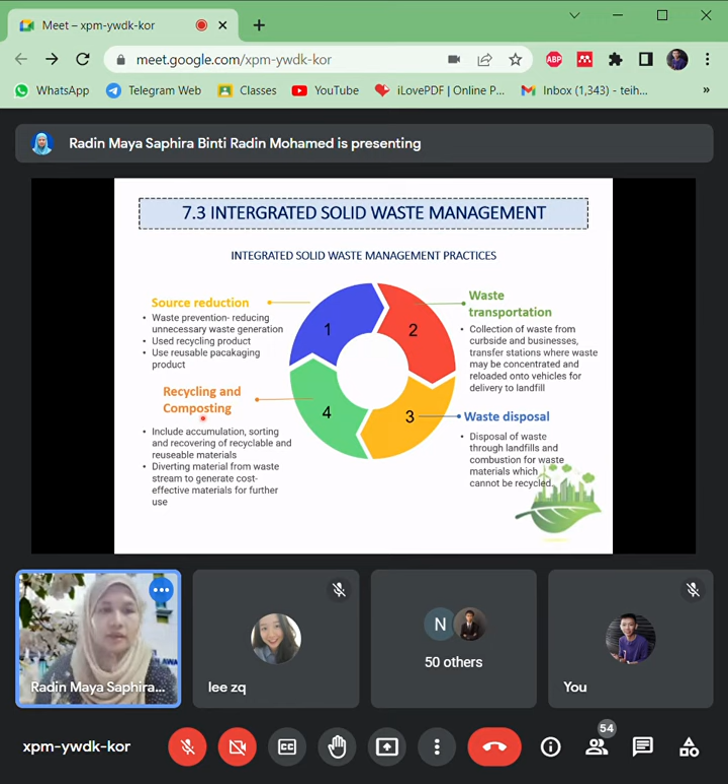Okay, and then this is at landfill. I will explain about what is the mechanism of landfill management. And then as we know, we need to always do this as a habit and culture, always recycle and do the composting from our waste. This is basically the landfill, the design itself is like this.

Tak ada network eh? Dengar tak suara saya? Network pun macam tak berapa bagus. Saya dah tekan. Dengar suara? Tapi yang ni tak okay. Kalau saya terkeluar, just in case, let me know ya. Sebab ni doktor, on off, kejap ada kejap tak ada.

Okay, so this is basically the sanitary landfill. Sanitary means they provide all of this facility with a treatment system. Treatment system here means leachate. What is leachate? Anyone who wants to answer about what does it mean by leachate? Ada siapa tahu?

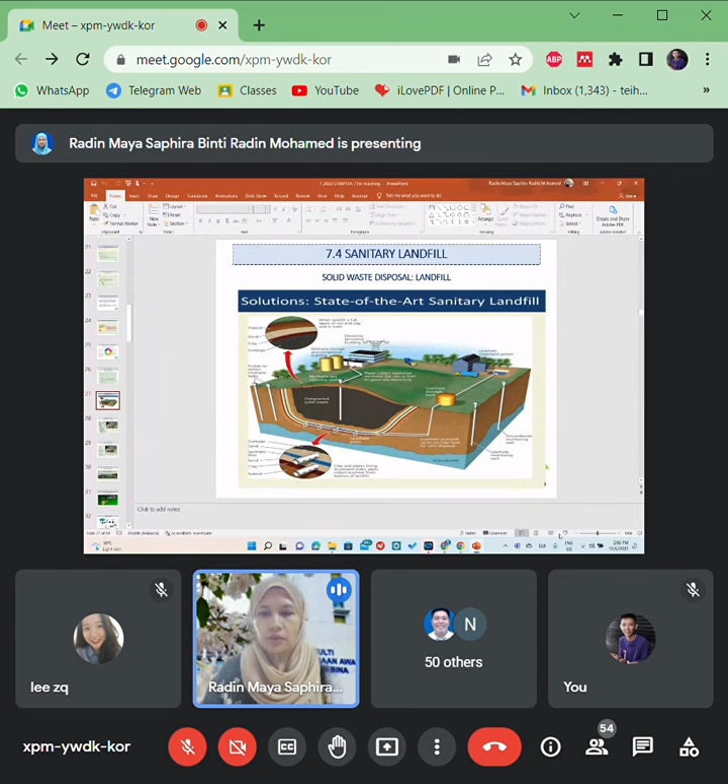That's correct. Basically, it is the liquid that comes from the waste, daripada sampah tu air larut resap. So this is a very dangerous liquid or solution because it carries all the hazardous waste. And this leachate, if we didn't treat it very well, it can go into the water bodies and disturb our water supply quality. So this is our main concern, leachate.

Leachate must be treated under a treatment system using secondary biological treatment, similar to what you learned in wastewater. The concept is the same - we have aeration, then we do the treatment using biological treatment. After that, we pump it out into a storage tank, and it goes into this piping line to reach the water bodies.

We discharge into the river. So basically this is the state of the art of the sanitary landfill. Sanitary landfill means they must provide the sanitary treatment process - treatment for leachate, and then they have piping to collect the methane gas. Sometimes the methane gas can also be captured for electricity.

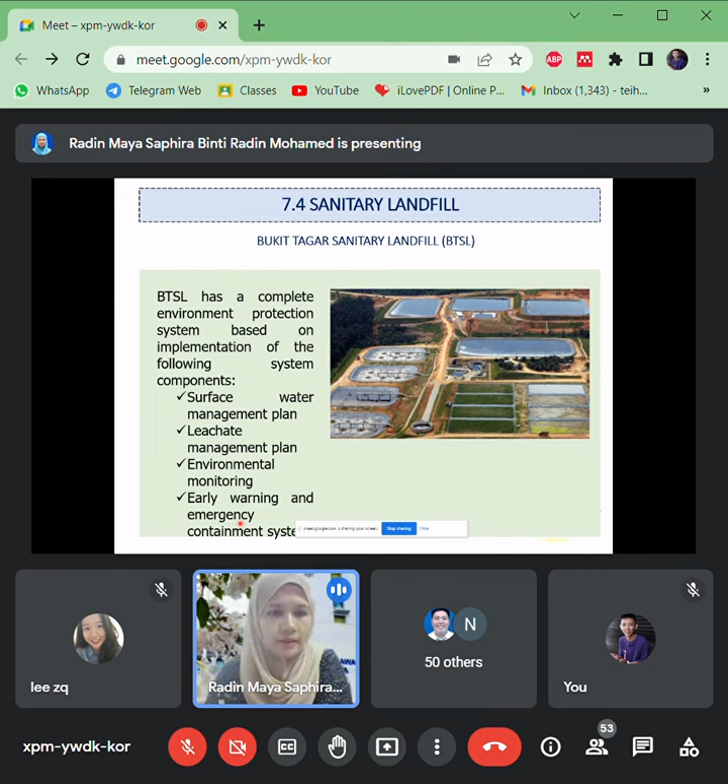This is an example of the Bukit Tagar sanitary landfill. We call it a third-generation sanitary landfill because it contains a surface water management plan, leachate management plan, and they also have monitoring for the environment, plus early warning and emergency containment systems, which is very good.

In Bukit Tagar they also have a renewable energy center which captures the methane gas for electricity.

If you have an opportunity to go on a site visit, or in future have the opportunity to work with this type of renewable center, that would be good. Examples from the landfill show we can get resource recovery.

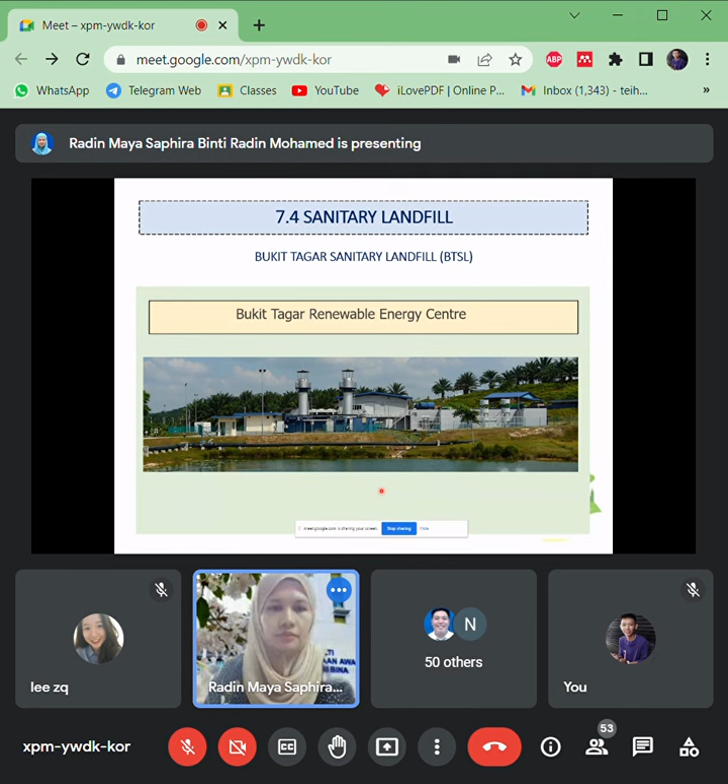Where is Bukit Tagar? Does anyone know? Bukit Tagar, I forgot. Does anyone know? In Selangor. Where in Selangor? Just Selangor. Okay, in Selangor - it must be generated from the waste generated from... it's really called Bukit Tagar, from the urban area, KL Selangor.

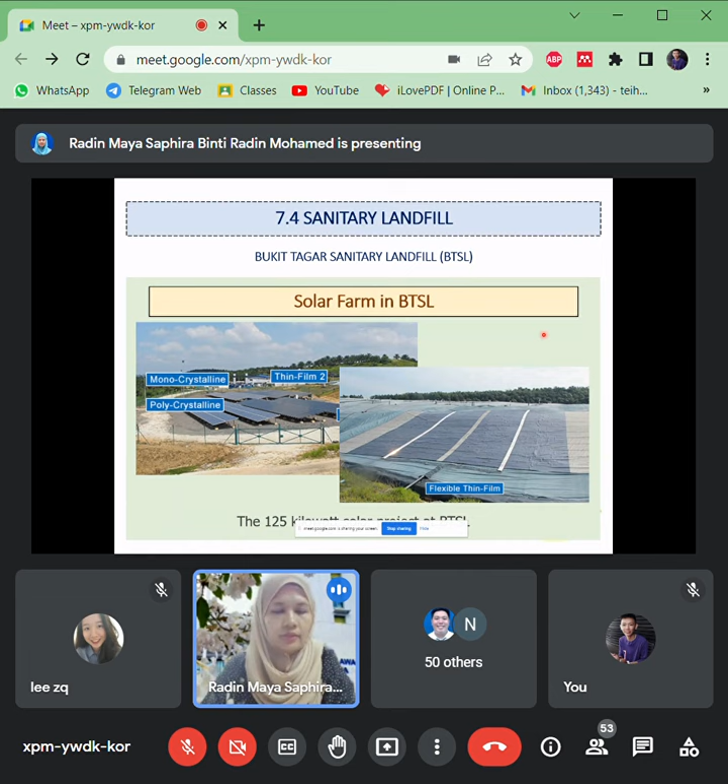Also in Bukit Tagar, they have this solar project to generate electricity, and that is the sanitary type. Sanitary means they provide all this treatment system for gas and especially for leachate, the liquid coming out from the waste.

But we also have another type which is non-sanitary, only a dump site. This is of very much concern for the environment because they don't provide any treatment for leachate and also don't capture the gas. So this type of landfill is very dangerous.

This is the landfilling method for depositing solid waste using trucks. Every day they must cover the material up to 20 to 30 centimeters, according to solid waste management. In Batu Pahat we have waste sorting.

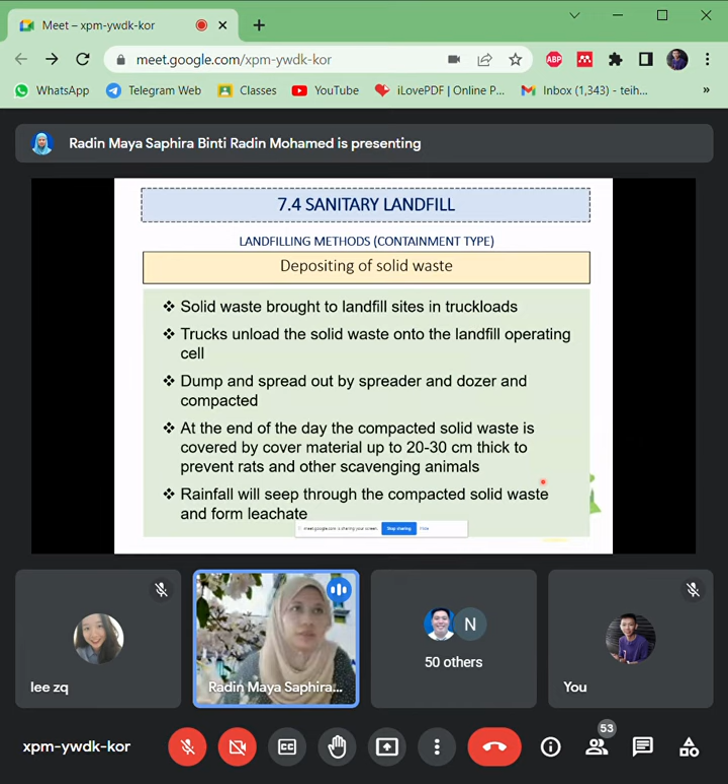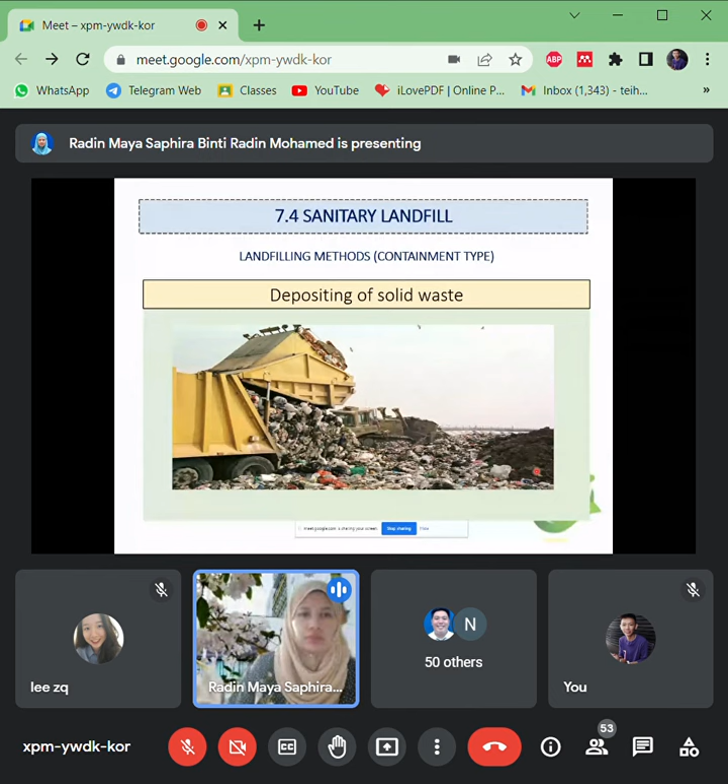Every truck must pay the contractor that manages the landfill. I don't remember how much, but they have to pay according to the load. This is how they deposit the solid waste, and this is a photo of how they spread the waste, do the compacting, and also the covering.

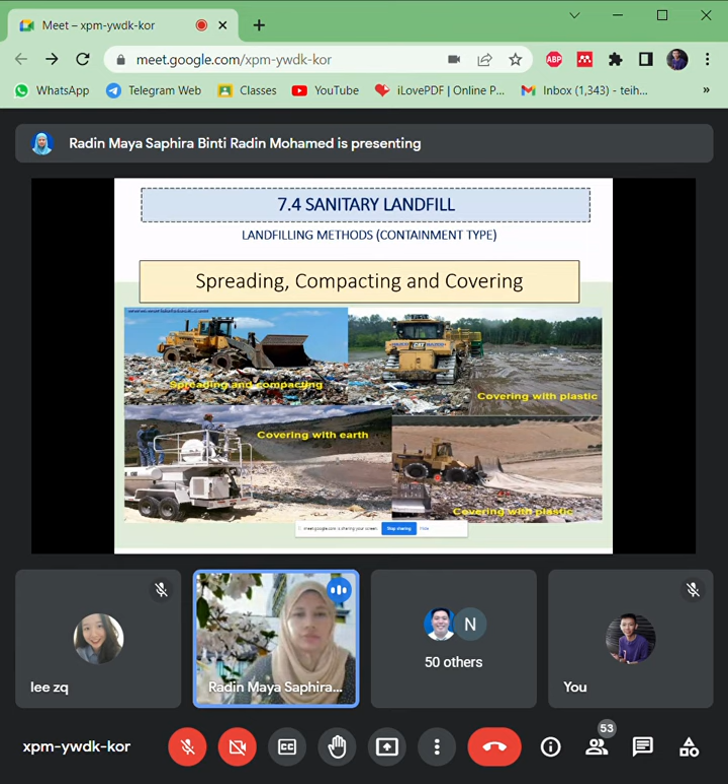After a certain layer, they must do the covering. This is how they do excavation trenches in order for the waste to be deposited in a certain area. So we can have the excavated trench or cell method, the area method, and also build like a canyon or depression method.

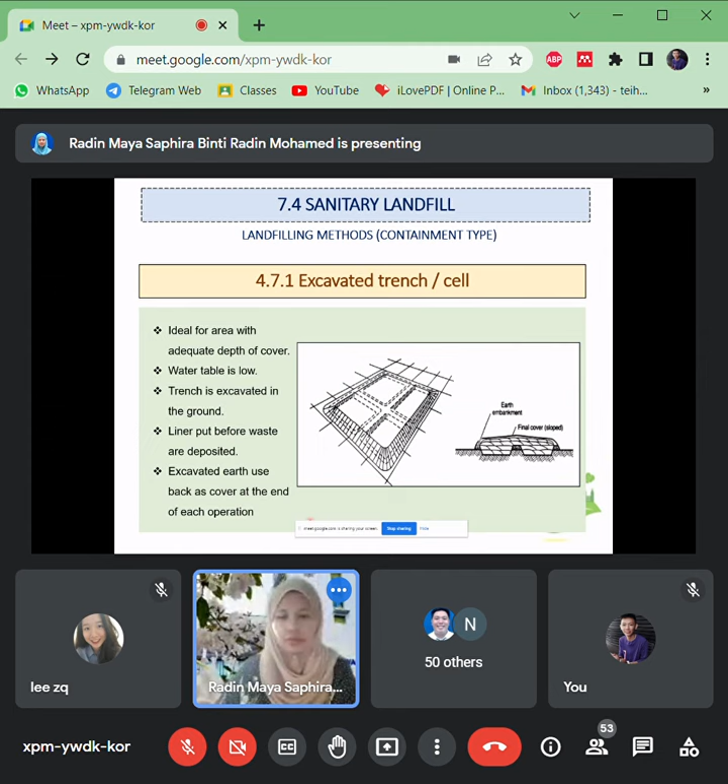This is how we can provide the cell, like a container for the waste to be deposited, and this is the excavated trench. For the daily cover, we must compact it like this. And this is the area method.

And then there are certain considerations that need to be considered. For example, terrain not suitable for excavation. Terrain ni dia macam levelnya. High groundwater level not suitable for this area method. Okay, and so on. This is the area method.

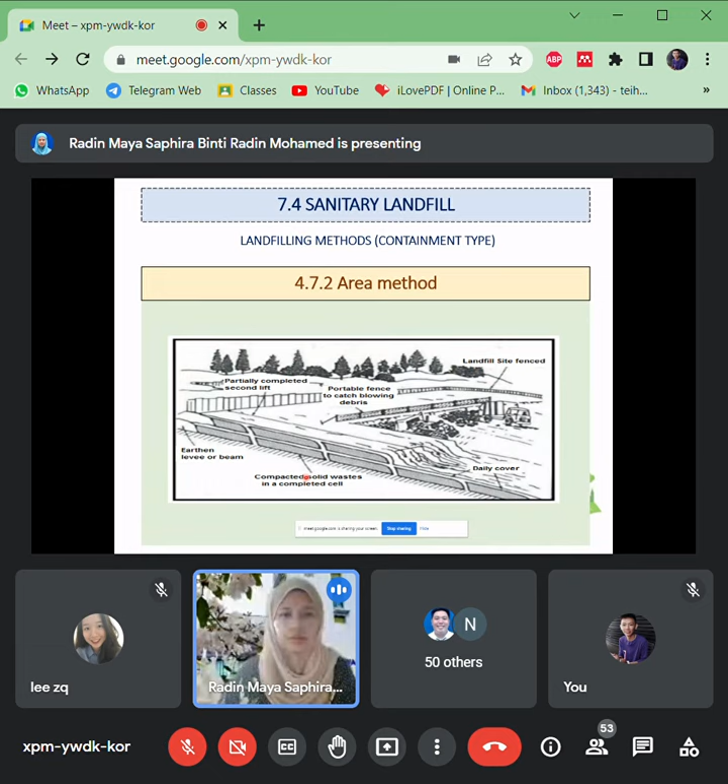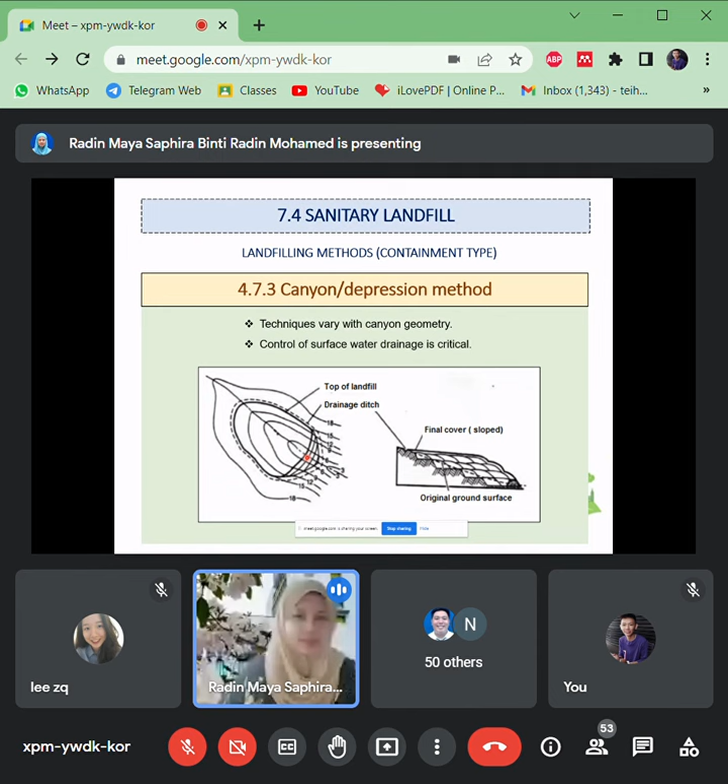So it's like having the side fencing like this. So this is the daily cover macam daripada bawah. So the safety also needs to be considered. For canyon, it's like we put it in hills like this, something like that. It's like this, layer by layer. This is the canyon type landfill.

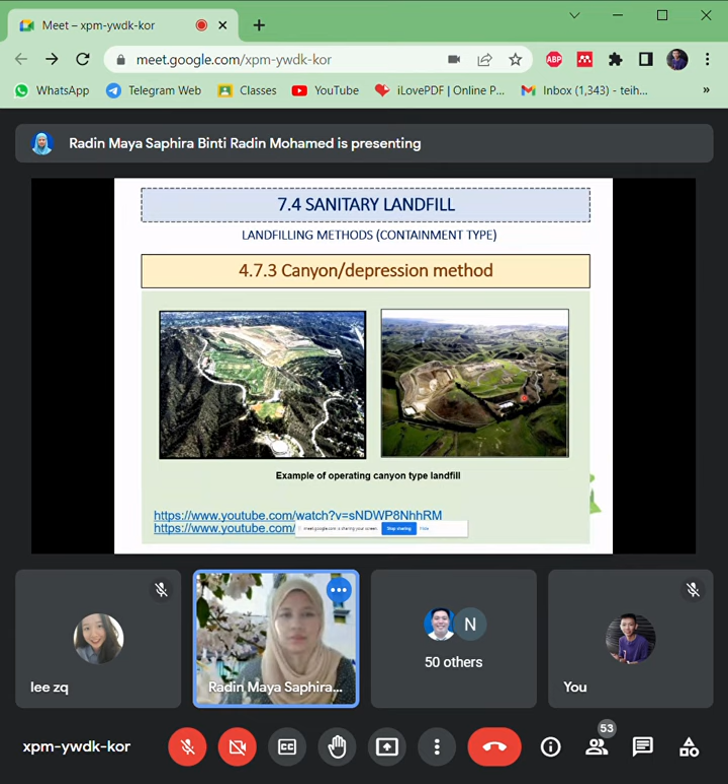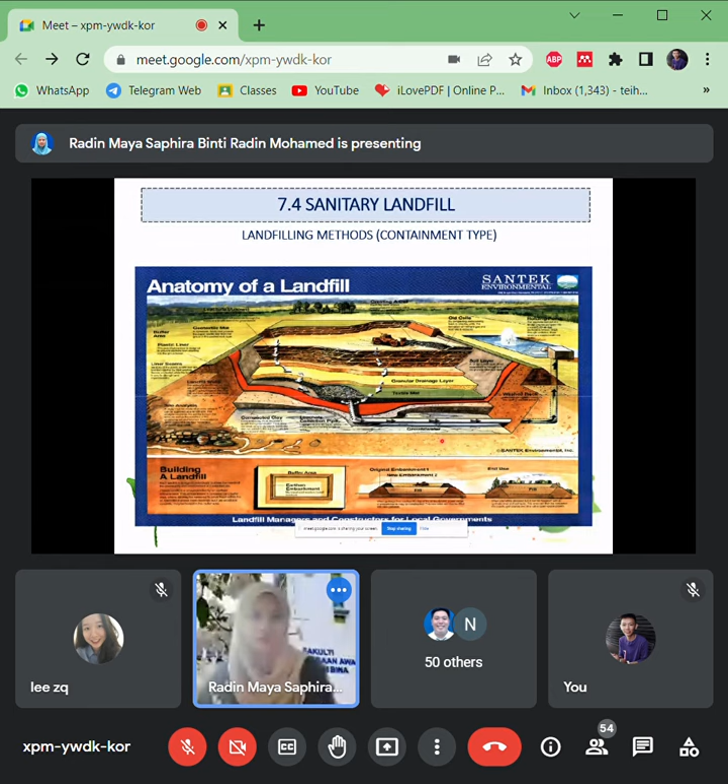The considerations are like this: landfilling methods, and then the landfill gas that is emitted, because it's very dangerous. It contains lots of methane gas. And then the cover layer must have these materials: geocomposite drainage layer, HDPE geomembrane liner, and compacted clay. This is to avoid the leachate directly infiltrating into our groundwater and also the water supply.

And we must also have the leachate collection pipe to the wastewater treatment plant. The leachate will be transferred to the treatment system for treatment. The treatment system must have aeration and also biological microbes to degrade the organic matter. So in Malaysia, we have certain classifications and standards that we need to follow before discharge into the water body. The landfill operator must adhere to all of these requirements by the Department of Environment.

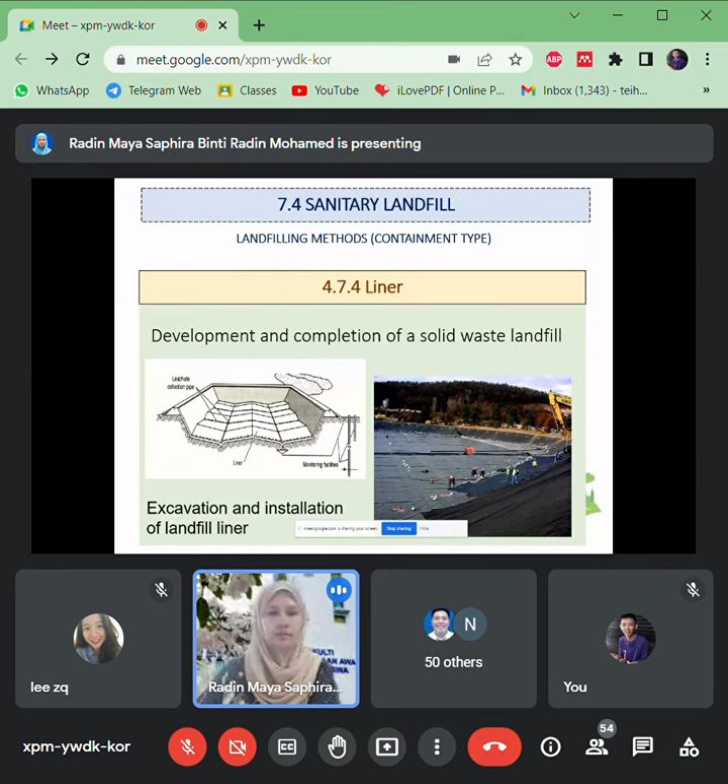Okay, this is the liner. During landfill development, we must install the landfill liner first. The landfill liner must have the geomembrane for the hydraulic barrier, geosynthetic clay liner, compacted clay, and also geotextile for cushioning and filtration. It looks like this during excavation and installation of the liner. It's like a baseline ataupun cover, especially for the landfill leachate, the liquid from the solid waste, from all of the domestic waste.

Okay, are there any questions so far about the landfill?

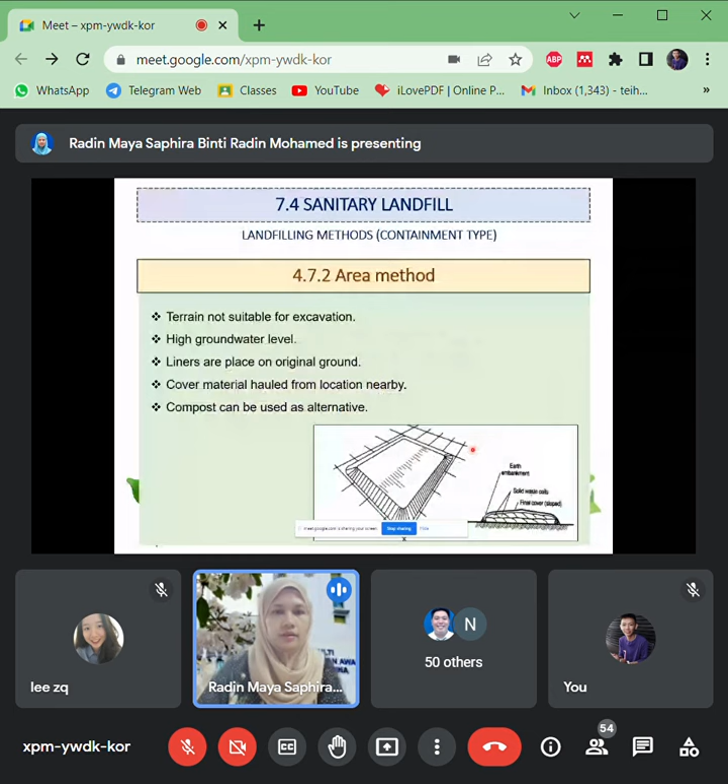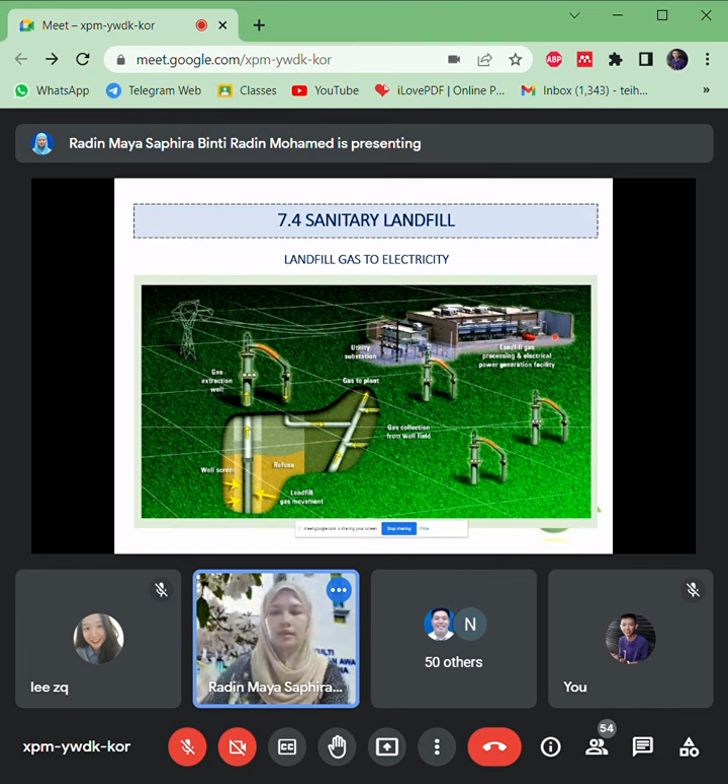Let me repeat. The most important thing in the sanitary landfill is the landfill leachate treatment system, itu kena ada, and also the gas extraction well. Gas is very important. Either you release it or the landfill has the facility to convert it into electricity like this, or renewable energy like this lah. Piping for the methane gas and so on is very important, and also the leachate.

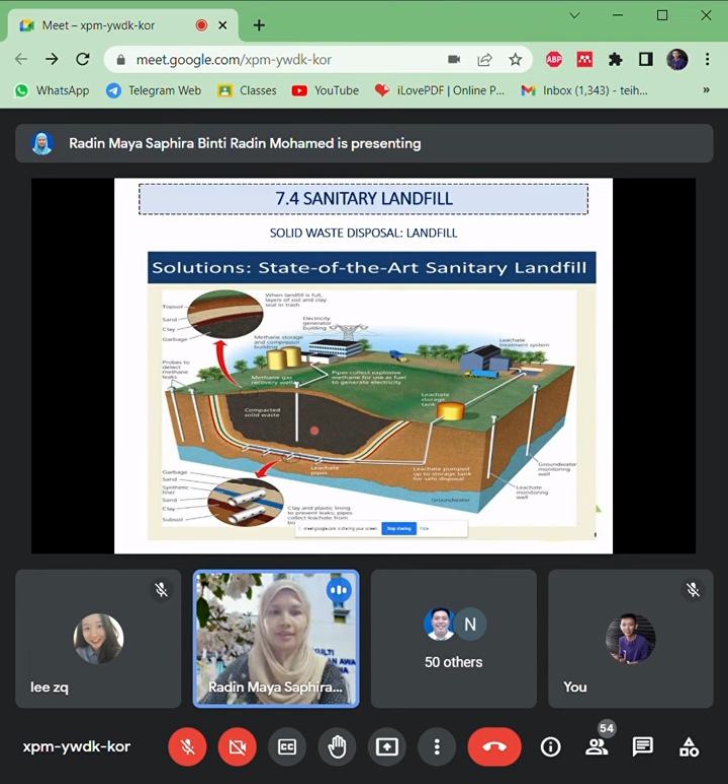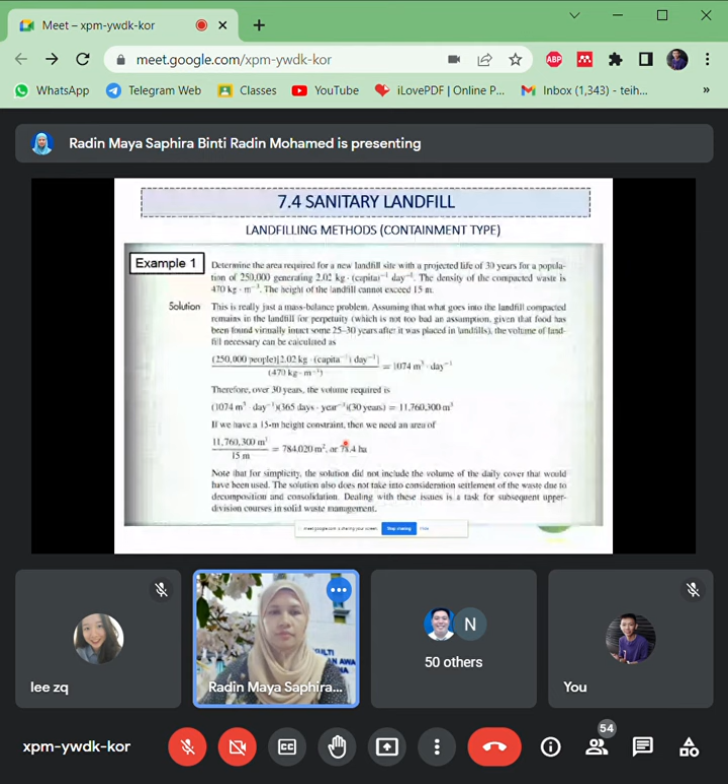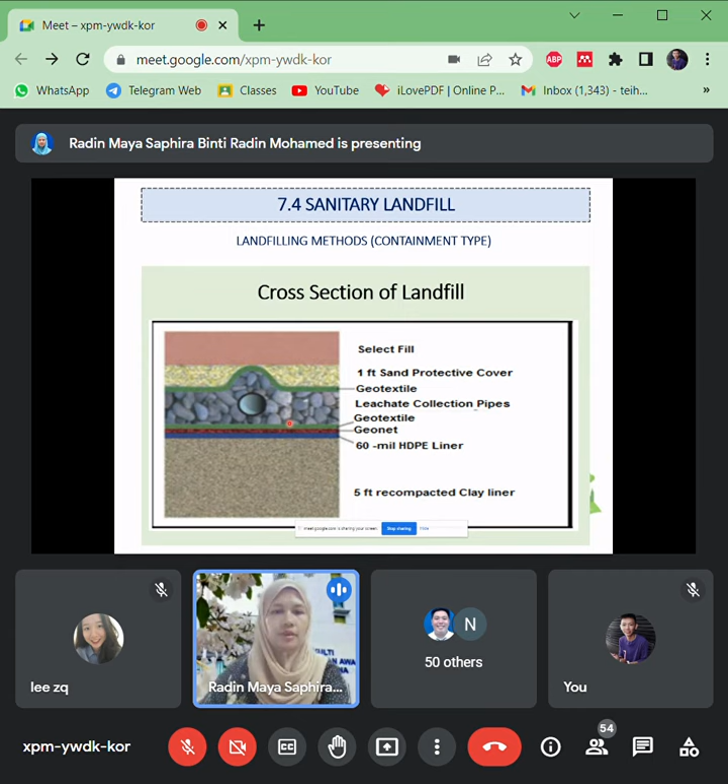So in order to prevent leachate pollution or leakage, we must provide this liner during the design. This is the cross-section of the leachate drainage layer. We must provide the geotextile and leachate collection pipes. This is the leachate collection pipe, and then we must have the geotextile, geonet, and also HDPE liner. So this is the standard for landfill development.

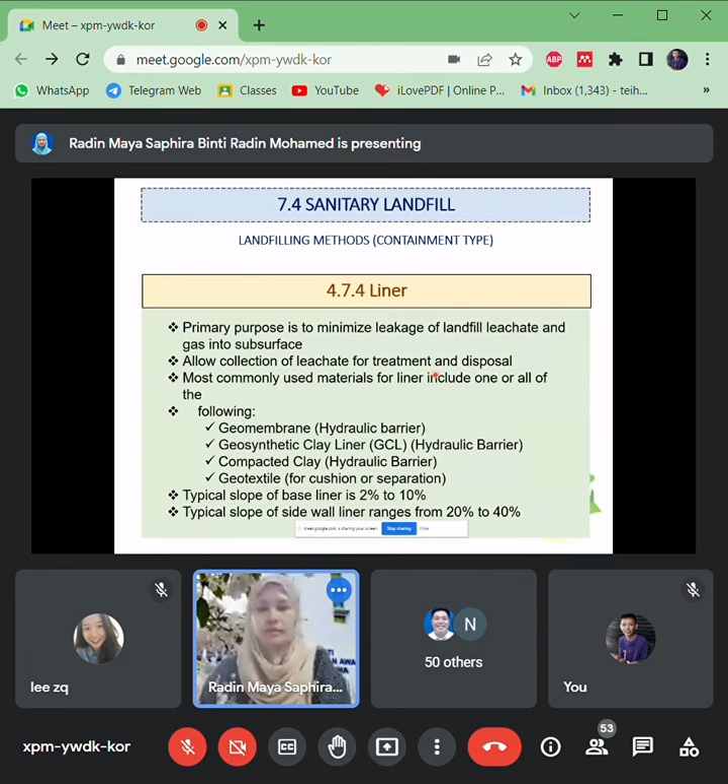Okay, then next is about the leachate, the major concern for the landfill. The success of a landfill depends on how they manage their landfill leachate. This is very highly contaminated because it comes from the solid waste that is dumped into the landfill. So we must draw it up by using a pumping system inside the landfill, to be treated. It must be treated first.

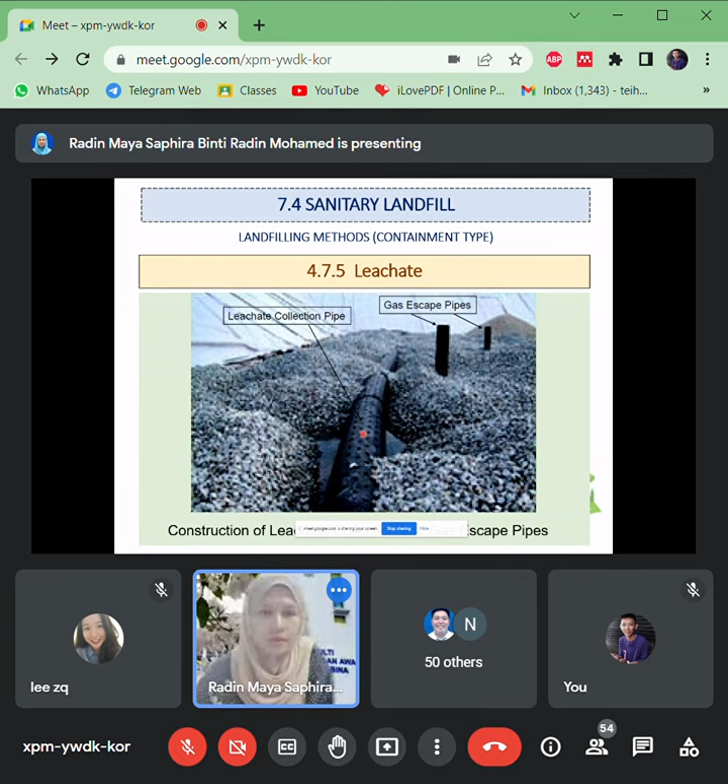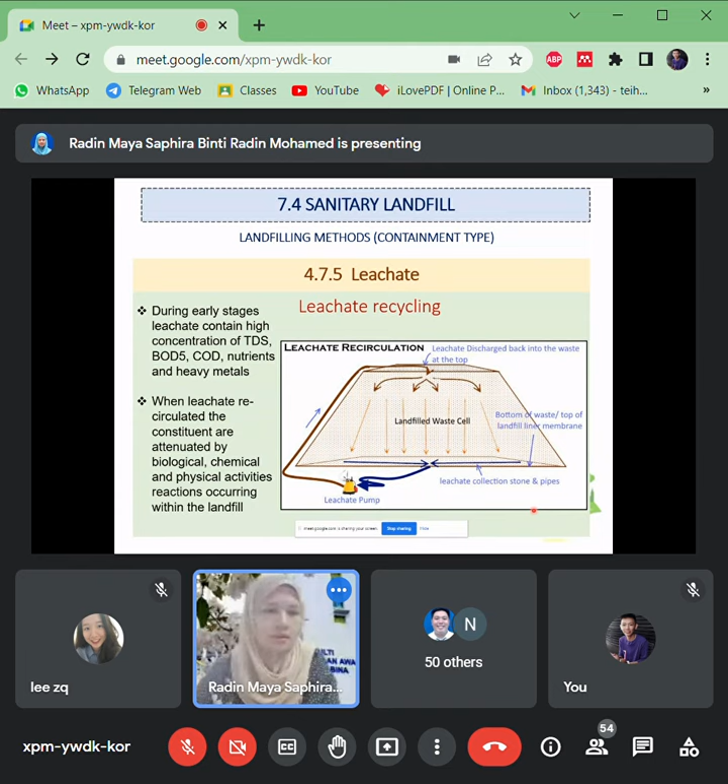Even though it contains high concentrations of TDS, total dissolved solids, BOD5, COD, nutrients and heavy metals, by using treatment the hazardous amount can be reduced with certain advanced technology. Then we can also recirculate it. We can use the leachate pump and recirculate it into the waste at the top, so they recirculate it through the landfill waste to maximize the treatment.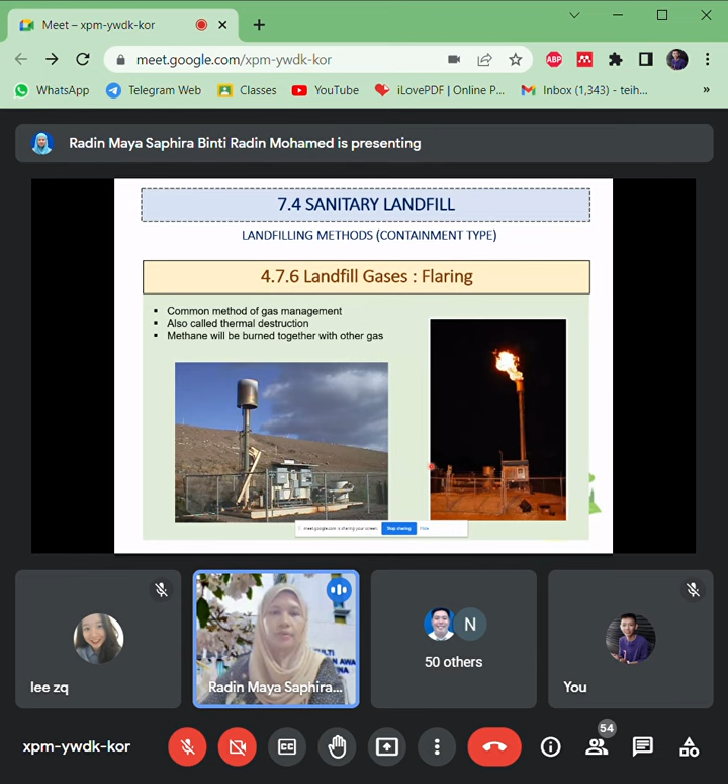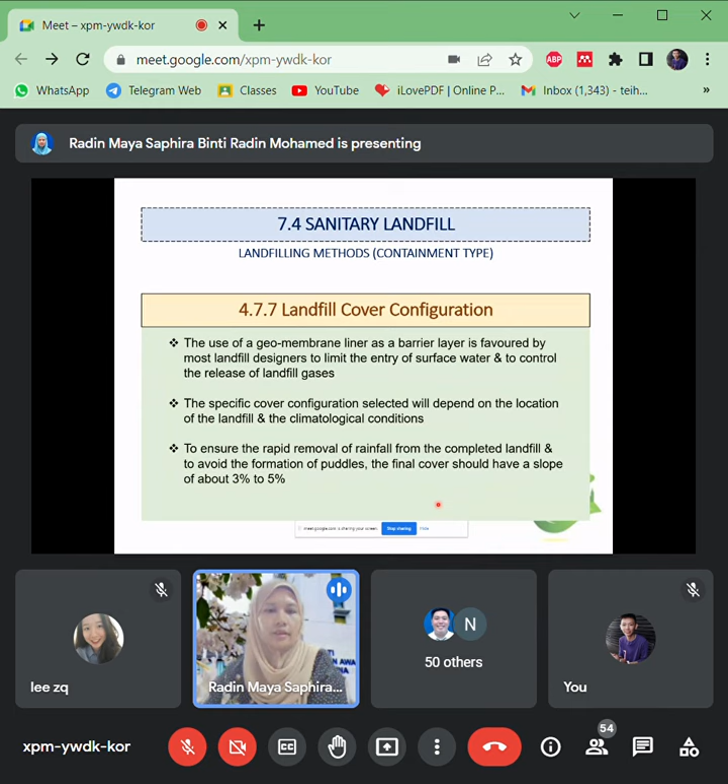Okay. The other is we can capture the methane gas and it will be transferred into the grid line for the electricity. Okay, this one is the landfill cover configuration. This is more on the geomembrane liner as a barrier layer to limit the entry of the surface water, and also for the landfill gas, especially to reduce the amount of leachate.

So you can see that this is the surface water drainage facility, which can provide the storm drains, the culvert, the ditches, and also the subsurface drain. This is for the surface water management drainage to make sure that the water can be stored or the discharge is properly managed.

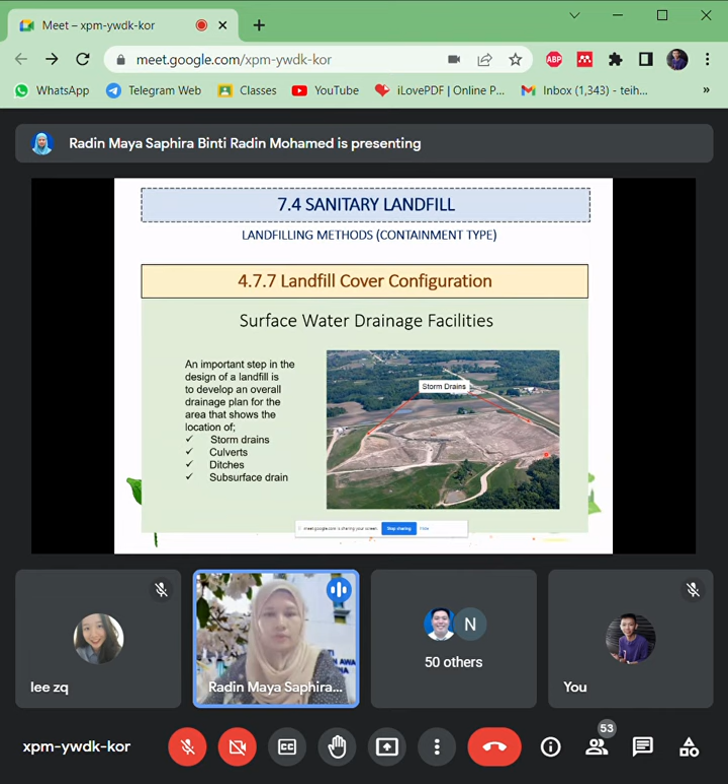Water stagnant. Okay, next is about the public health and safety, of course, because the landfill has lots of risk to human health. Okay, when we deal with solid waste, something that is unwanted, imagine from the food waste, from the hospital waste, everything that we dump into our bin, then collected by the worker, laborer.

Actually, in Japan or developed countries, their commitment or their job is highly respected, compared to Malaysia. Because it's very important. Otherwise, who will manage the rubbish? We'd have to bring it to the landfill if they weren't there. Okay, I know that this is kind of their job, but I think their work is very important in our daily life and also the activity.

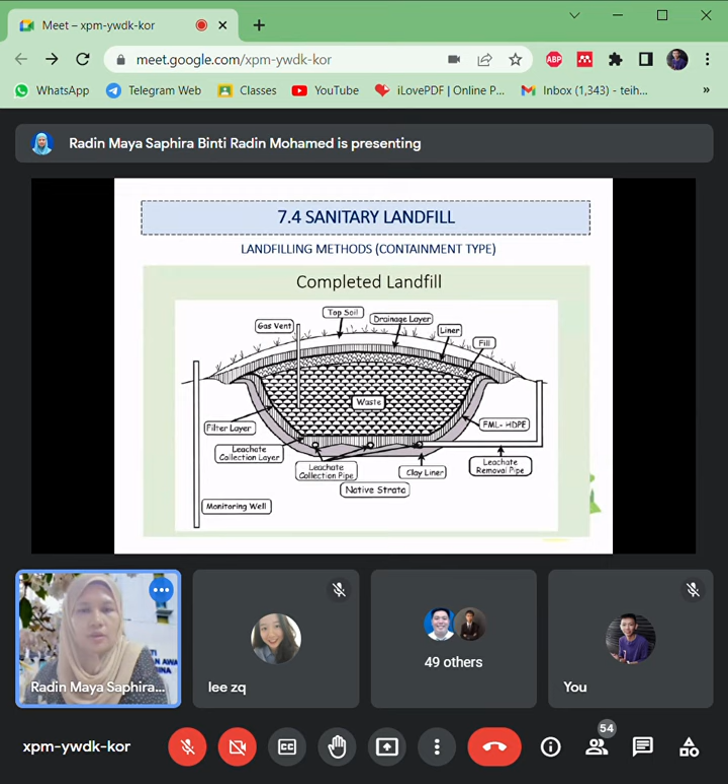Okay, examples of the closed landfill. Actually, to close the landfill is not easy. They must provide the safety requirement and also how they manage the leachate. Leachate itself can take a few years to be stabilized. The leachate has very high contents of hazardous waste, right? So we need to stabilize the landfill leachate before you can make the full closure of the landfill.

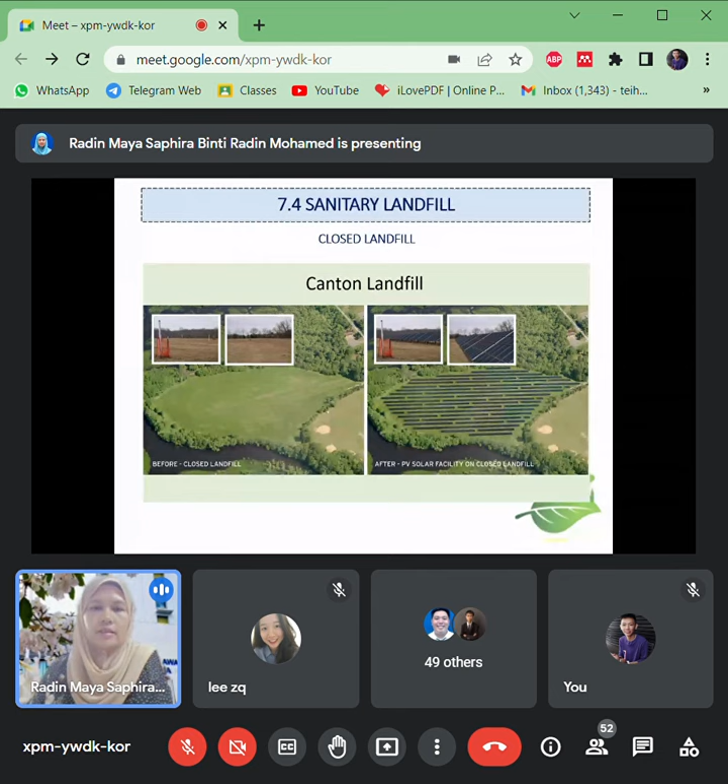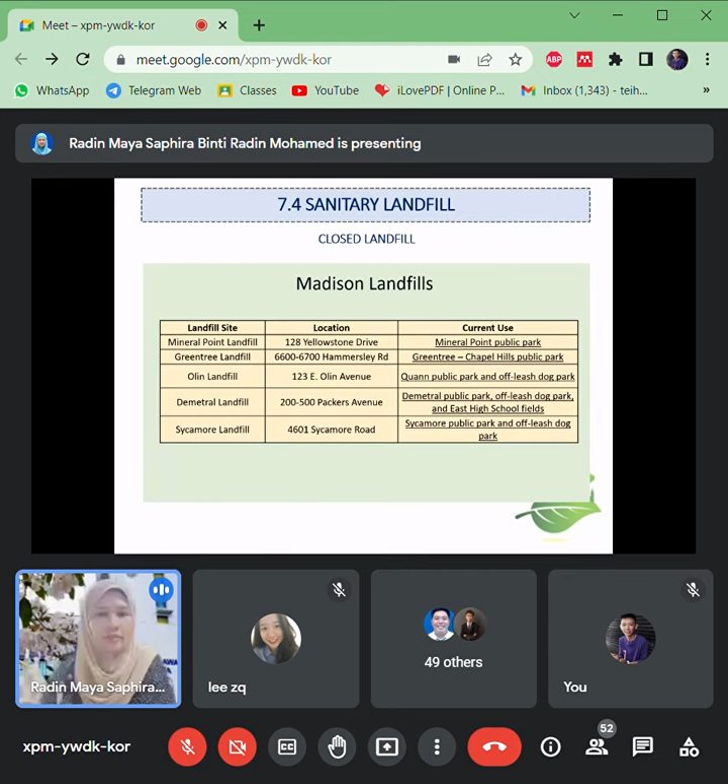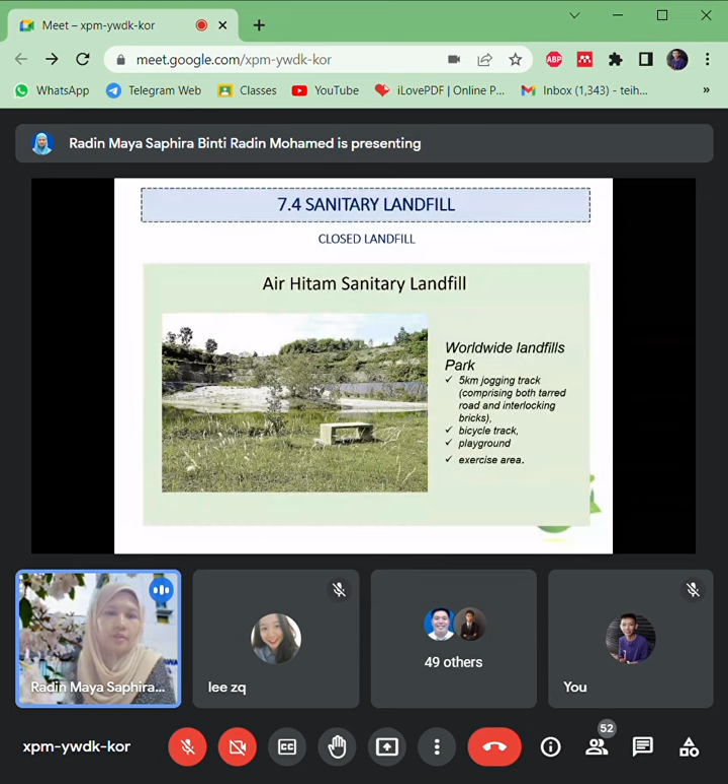Okay. So any questions regarding the landfill, leachate, gas management, anything? Any? If not, then I can proceed with the next, which is on scheduled waste. So what does it mean by scheduled waste?

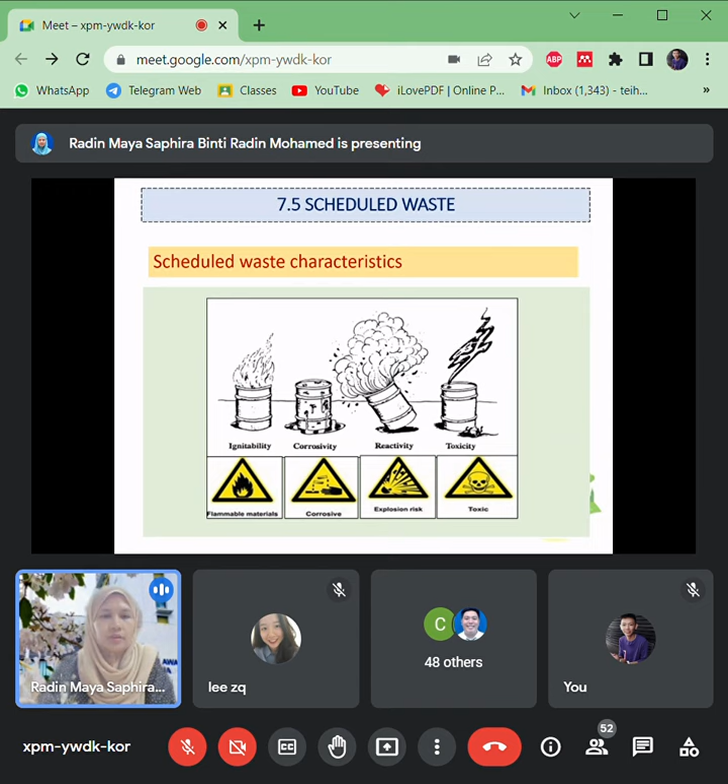Okay, then ignitable waste means they are waste that readily can catch fire or sustain combustion. Sama ada it can be an oxidizer, dia ada maksudnya bila dia jumpa dengan oxygen, it can oxidize. Or it can be flammable compressed gas. It could be paints, cleaners and other industrial waste. And ignitable waste from the liquid form ya.

So adalah karakteristik dia. Waste acidic or alkaline, corrosive, like sulfuric acid and so on. From the automotive, battery. Toxicity and something that can pose a threat to humans and also to the environment lah. I can summarize like that. Toxic. Okay, let me ask you, do you think that the battery kan, because in our daily life we use quite an amount of batteries, is it scheduled waste or not?

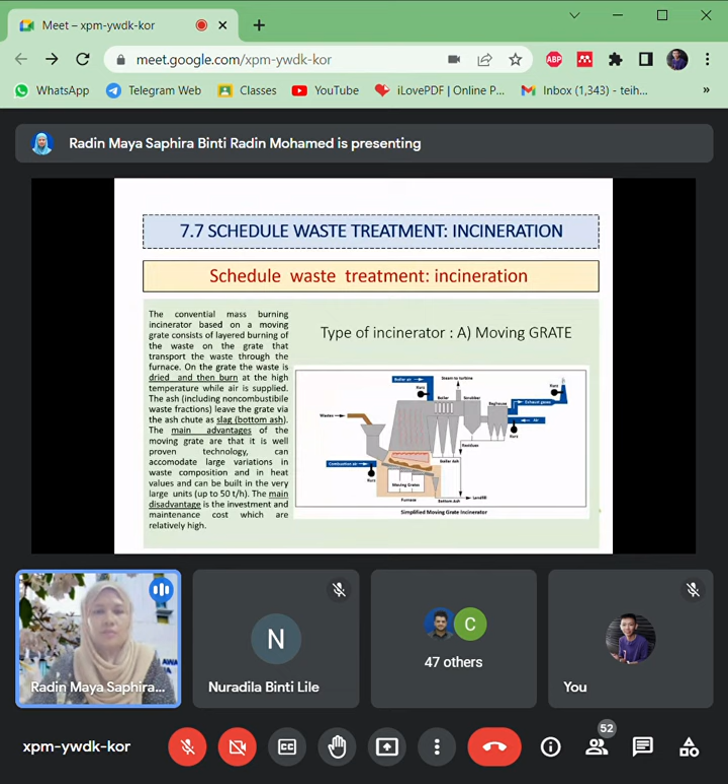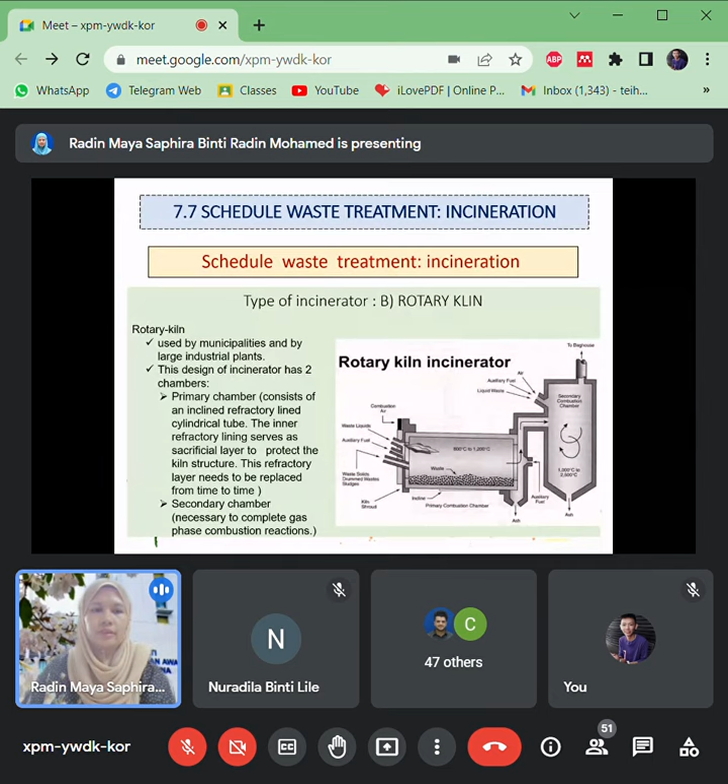Okay. And then there are two types of incinerator. One is the moving grate and another one is the rotary kiln. So here the waste can be inserted into this chamber. Kita panggil sebagai rotary kiln, and then the waste will burn at a maximum of 1200 degrees Celsius. Then they have this secondary combustion chamber to make the second combustion, and then they filter the fly ash to the baghouse. This is to filter the ash. Or another one is the fluidized bed, like this. Okay.

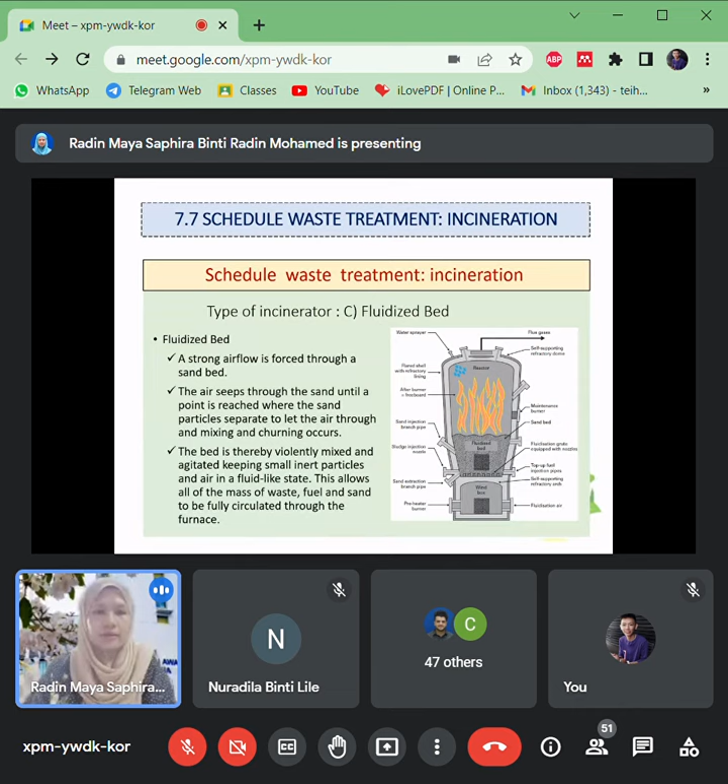And okay, another treatment for the scheduled waste is solidification. They make it solidify. Macam mana cara dia? Kita mixing waste tu with the binding agent and modify their physical properties. So here we can do solidification for certain products like brick, itu boleh lah. Okay, but we need to make sure that their physical properties and also the waste properties must be what we call inert, dah tak ada apa-apa dalam tu.

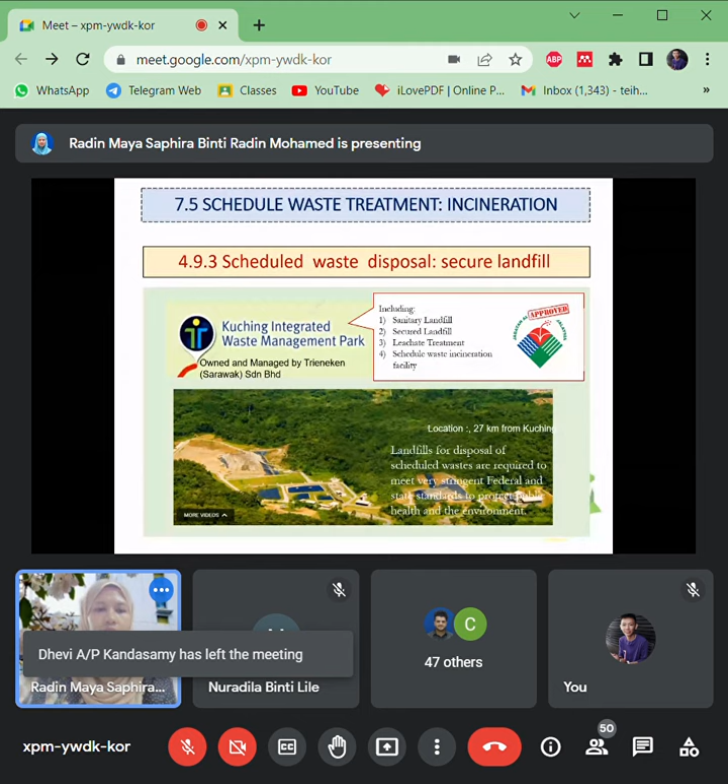Okay, then these are examples of the secure landfill to dispose of the scheduled waste. Certain waste, for example from certain chemicals or certain hazardous waste, after being treated, can be disposed into the landfill.

Yang ni boleh. Okay, in Malaysia, we have one company that handles the scheduled waste. We call it the Kualiti Alam Waste Management Center under Cenviro Company. Yang ni lah sebenarnya yang collect all the hazardous waste from the lab. Kalau kat ni, we need to deal with the company to collect our scheduled waste or hazardous waste. The center has the license to handle 76 of the 77 categories of scheduled waste under the environmental quality regulations for scheduled waste.

So it's like a one-stop center under the concept of cradle to grave. Boleh kita nak lupuskan daripada lahir sampailah dia dihapuskan. So in the secure landfill, Kualiti Alam has the waste generator to the waste management center. They have several facilities for the treatment of the scheduled waste, depending on the type. Incineration, lepas tu hantar abu dia ke secure landfill.

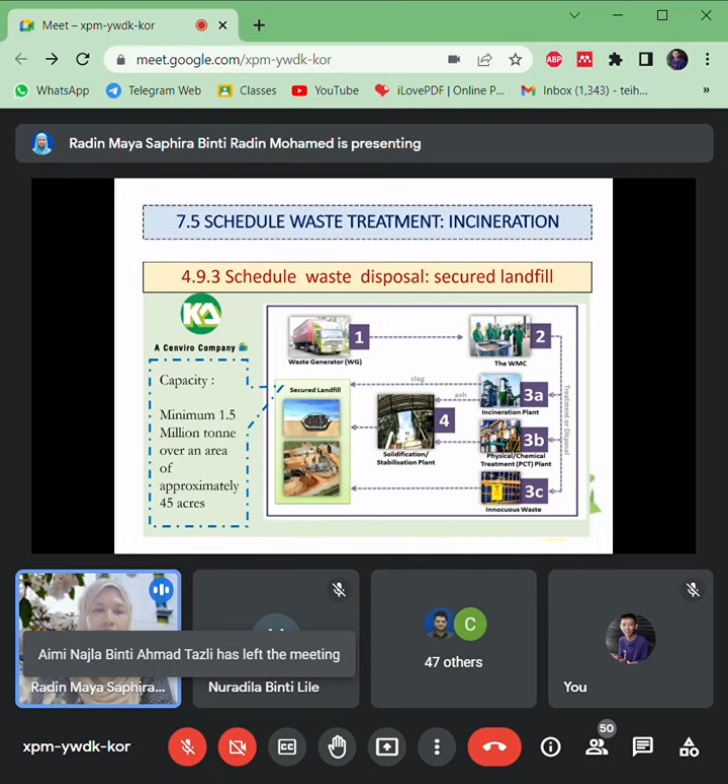Or they must provide physical and chemical treatment first, and after that they can do solidification or stabilization treatment. Either it goes to the landfill, or they make a new product from the waste, or the waste must have special disposal like this, the secure landfill. Ni yang paling bahaya, toxic. Okay, that's all about the scheduled waste.

Dah pukul 3 dah. So, ada soalan tak untuk solid waste and hazardous waste or scheduled waste? Tak ada. So kalau tak ada, then we need to proceed to the project presentation. Is it okay? For group 7. Tapi saya nak kena download kejap, so boleh ready dulu. Group 7. Sambil saya buka ni juga. Download your report.

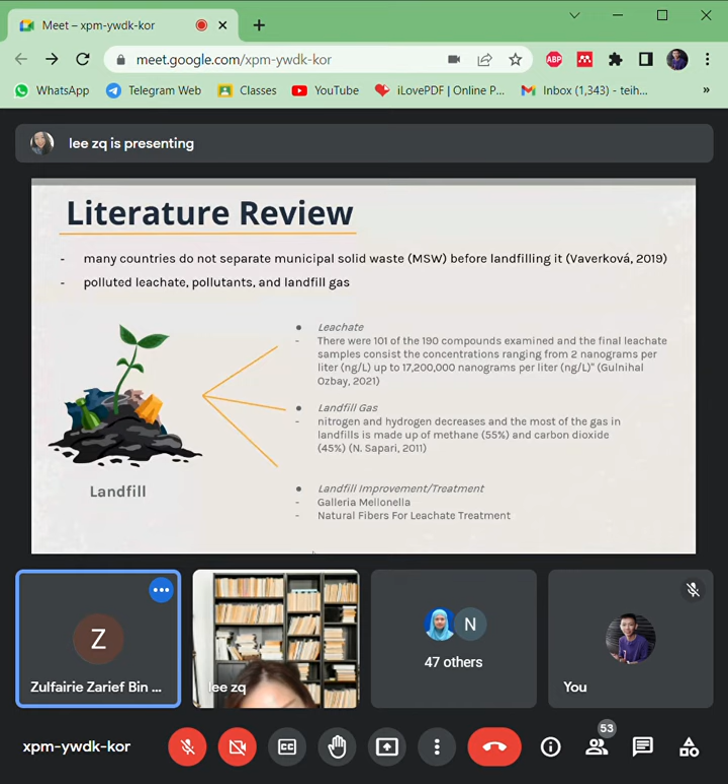Hello, Assalamualaikum. My name is Mukri and I will continue with the literature review. Based on previous research about leachate, 101 of the 190 compounds examined were found, and the final leachate samples had concentrations ranging from 2 nanograms per liter up to 17,200,000 nanograms per liter. For the landfill gas, nitrogen and hydrogen decrease, and most of the gas in a landfill is made up of 55% methane and 45% carbon dioxide.

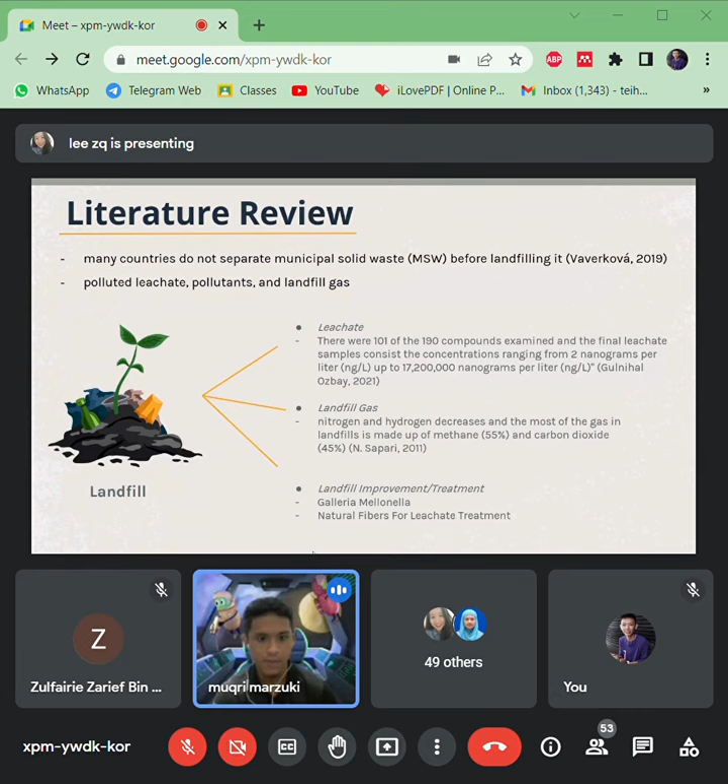There are two things that will be reviewed, which are Galleria mellonella and natural fibers for leachate treatment. Next. The first one is Galleria mellonella, known as wax moth caterpillars, just like in the pictures. Previous research found that some insects have the ability to chew and devour plastic packaging.

In research done by Bombelli, the caterpillars could destroy a PE film within 40 minutes. There was also mass loss of the plastic bags when in contact with 100 caterpillars. Then, FTIR studies concluded that Galleria mellonella can break down the chemical bonds of PE, and the digestive tracts of insects are suitable for PE-degrading microorganisms. Next.

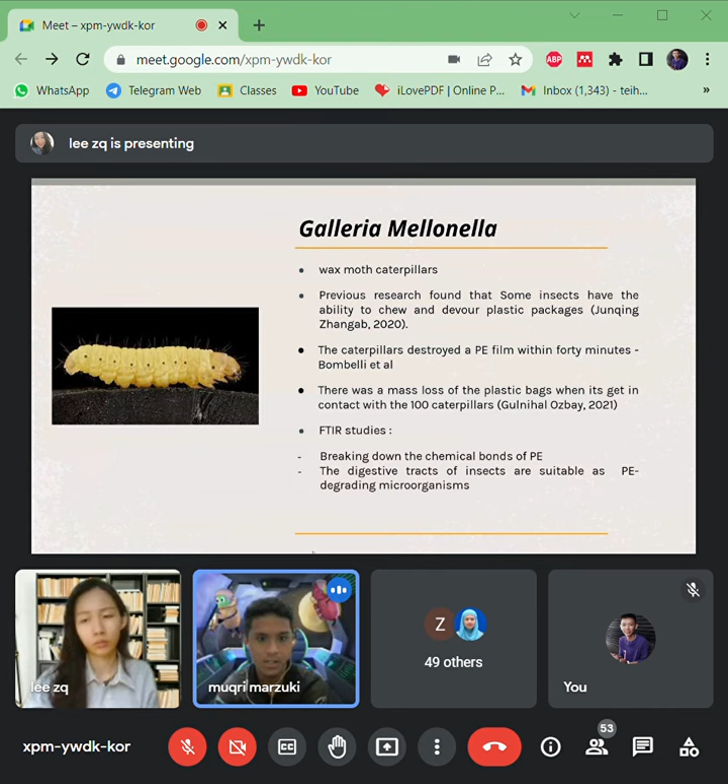The second one is natural fibers for leachate treatment. In a research, it was found that landfill leachate could be treated with natural fibers incorporated with advanced oxidation processes (AOPs). AOPs were first suggested as a way to treat potable water in the 1980s. AOPs can purify water by generating enough hydroxyl radicals.

The leachate treatment involved two oxidative stages, each assisted by natural fibers. For example, palm fiber has a thinner layer of lignin, giving electrostatic attraction in natural or cellulosic fibers. The results show that reduction in surface tension and increasing the contact surface both contribute to better results in the leachate treatment process. That's all from me.

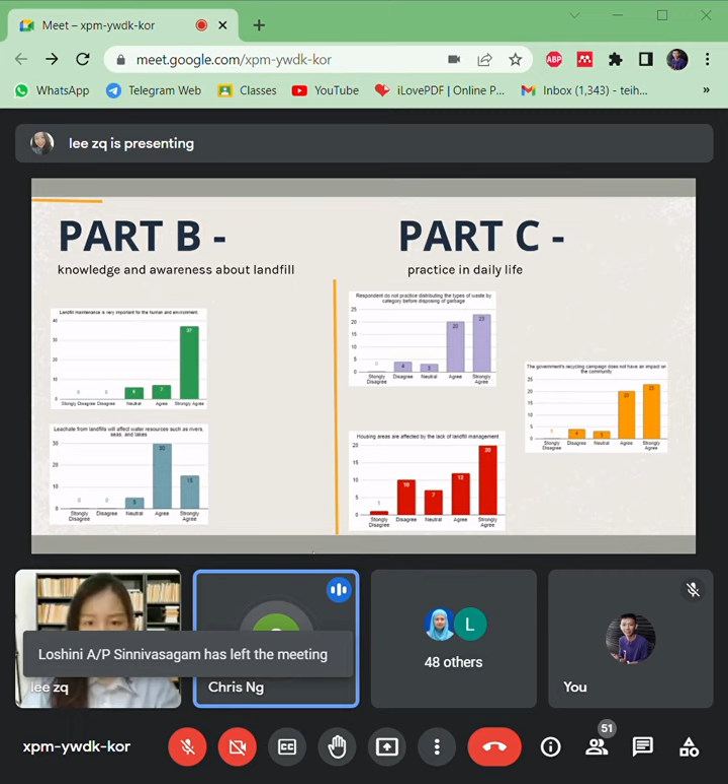For part C, questions about practice in daily life: respondents do not practice distributing types of waste by category before disposing of garbage. Also, respondents agree with the statement that government recycling campaigns do not have an impact on the community. The Star 2019 stated that about 60% of the 32 million Malaysians fail to throw garbage into the rubbish bin and recycle bin already provided for them.

Some states, like Johor, charge 20 cents in supermarkets to reduce plastic usage. But it's just 20 cents, right? There are still some people willing to pay 20 cents for a plastic bag. So it's not really implemented well. The more material you use or throw away, the more energy is used to source and process raw materials. This produces emissions and potentially releases methane from the landfill area.

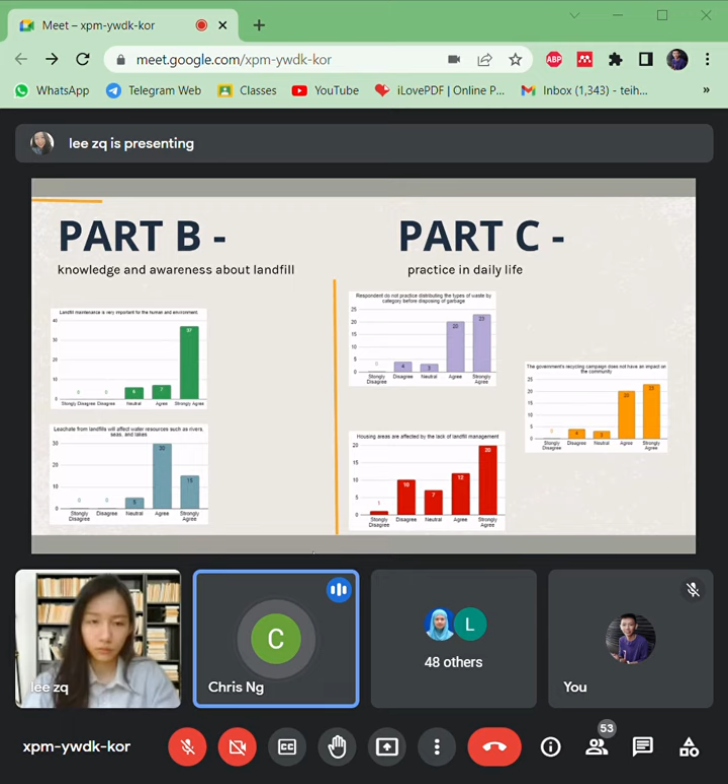Some respondents live in housing areas affected by landfill management, so we know the responses we collected are actually from people who are affected. So for part D, next.

For part D, questions about factors that influence the efficiency of the landfill: more than half said Malaysians are unaware of the impact of poor landfill management on the environment. But respondents stated that Malaysians are aware of garbage disposal. Maybe this is because media nowadays focuses so much on recycling campaigns and plastic's effect on the environment, how long plastic takes to decompose, but there is no awareness about landfill.

Maybe there is some awareness, but very little. Because for me, I never see awareness about landfill on TV - how plastic affects landfill, how landfill affects the environment. So I think it's very minimal.

Respondents also agree with the statement that policies and regulations established by the government are not implemented well. Although Malaysia is among the developing countries, we cannot deny that economic problems still occur. For example, Malaysia faces problems upgrading landfills due to lack of budget and expensive land prices in Malaysia.

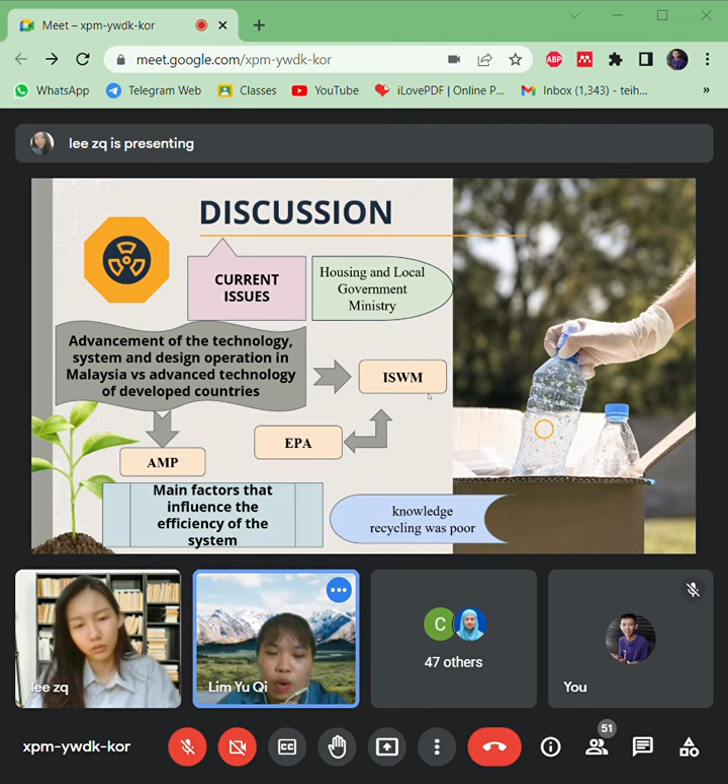For the first step of ISWM, it is reduce and reuse at the source. This can reduce the cost for residents, businesses and local authorities, as they do not collect a lot of waste, so the pollution generated in waste transportation and landfill is reduced.

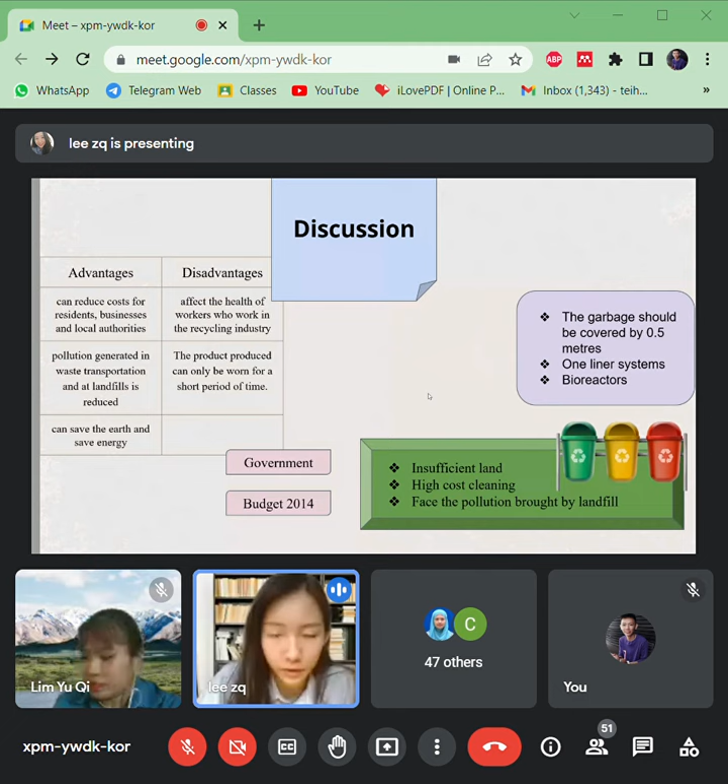The problem to be faced next - okay, let's proceed to the conclusion.

For the conclusion, proper landfill management, advanced landfill design and technology maximize the benefits of landfills and minimize the environmental, social and economic impact. Issues such as technical, economic, environmental and social issues will affect the sustainability of municipal solid waste to energy, to minimize landfill waste volume.

From our study and survey conducted, there is low public awareness of landfill's adverse impact and involvement in recycling and waste prevention practices in daily life. Individuals, communities and government should unite to eliminate landfill trash and strive for more sustainable waste management, or else, no matter how large the landfill, it will run out of space.

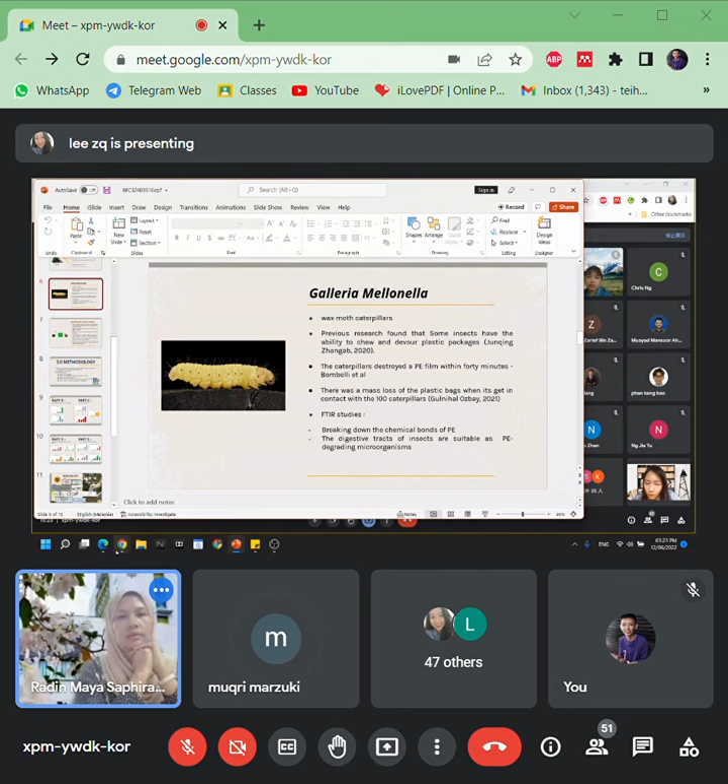There's a lot lacking in terms of information. For example, the conclusion mentions recycling awareness being low, but when I looked for the data it wasn't there, very general. I expected you to do individual survey data, at least asking whether people recycle at home daily as a practice. If you can get a second opinion, not necessarily from the waste management center or landfill since I know it's difficult to get them, even workers who collect garbage daily would be fine.

That's my comment. Then about the information, very good information on this caterpillar, but it's not very clear from where, so that we can propose this caterpillar to degrade microorganisms in Malaysia. But the rest is good. Your survey, analysis and presentation are also okay, good. So that's all for group 7.

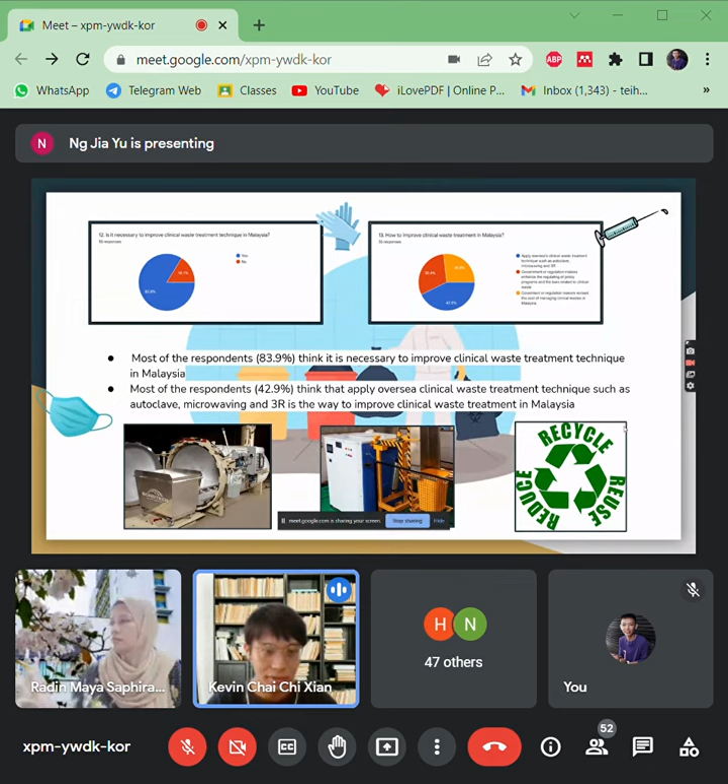Next, most of the respondents think that it is necessary to improve the clinical waste treatment technique in Malaysia, and they think that applying overseas clinical waste treatment techniques such as autoclave, microwaving, and 3R is the way to improve clinical waste treatment in Malaysia.

Next, for the interview, we had an interview session with Muhammad Fazil bin Wahab, the Assistant Environmental Health Officer. For the first question: what types of waste are known as clinical waste, and why is managing clinical waste important? Clinical waste is any waste consisting of human tissue, blood, body fluids, pharmaceutical drugs, medical materials such as syringes, and questionable equipment that can be a threat to anyone who handles or has direct contact with the equipment.

Clinical waste treatment is important because it poses a hazard to the operator and the surrounding people. If clinical waste treatment is not carried out, it will affect the level of public health.

Next question: what are the steps and procedures for handling clinical waste? First, waste segregation. It will identify whether the waste is clinical waste or domestic waste. If it is clinical waste, it will identify whether it is contaminated or not. If it is contaminated, it will identify whether it is sharp or non-sharp. If it is sharp, it is put in the sharps container. If it is non-sharp, it is put in the yellow clinical waste bag and goes to disposal.

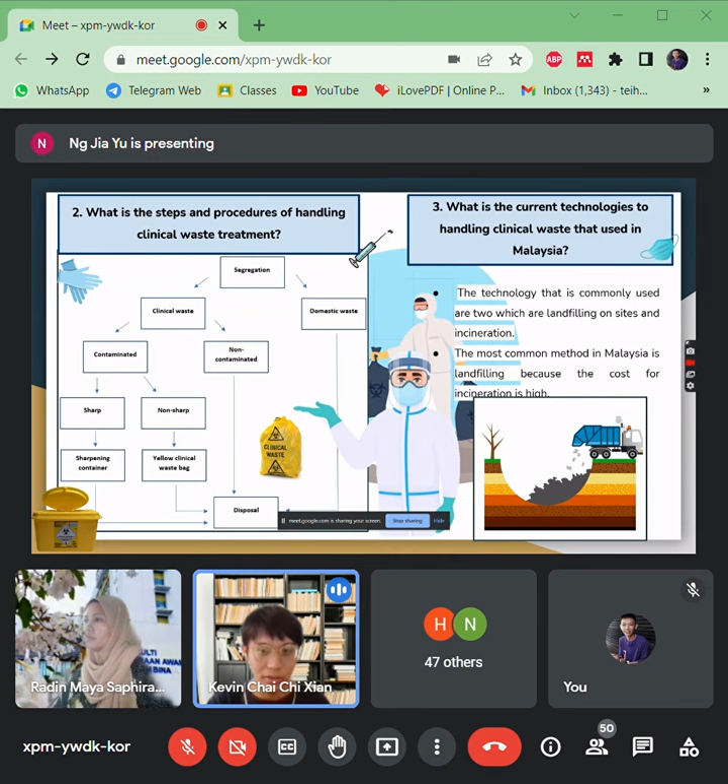Which technology is the best method for medical waste treatment? For landfilling, the advantage is low cost, but it needs a large space. Incineration doesn't require a large space, and the output is more complete because it can burn the waste into dust and smoke, but it is high cost. But if Malaysia can afford it, incineration is a better method.

How can the public help in solving clinical waste issues? The government has campaigns for waste disposal, such as glass, paper, and plastic. The public should support the campaign and segregate garbage according to the categories. Waste from COVID-19 patients, such as tissue and food containers, should be separated from other waste and sterilized first before throwing it away.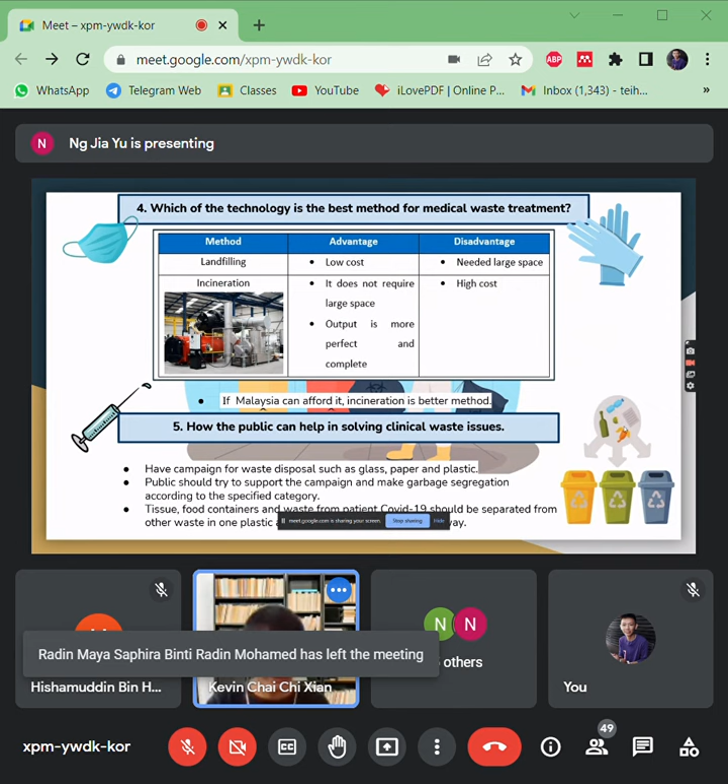I will present about the solution. As we already know, for the past 2 years, the COVID-19 outbreak has spread around the globe. The clinical waste treatment in Malaysia is facing

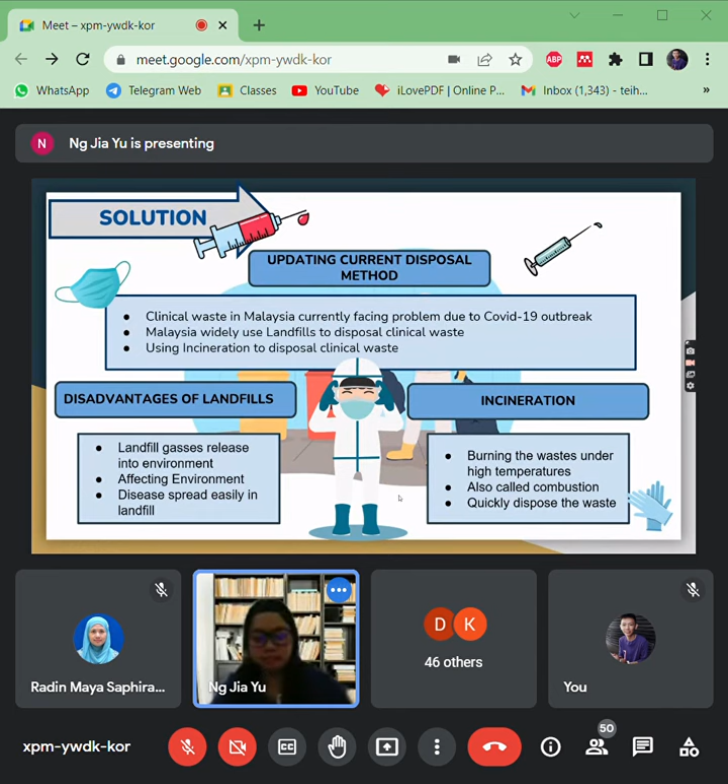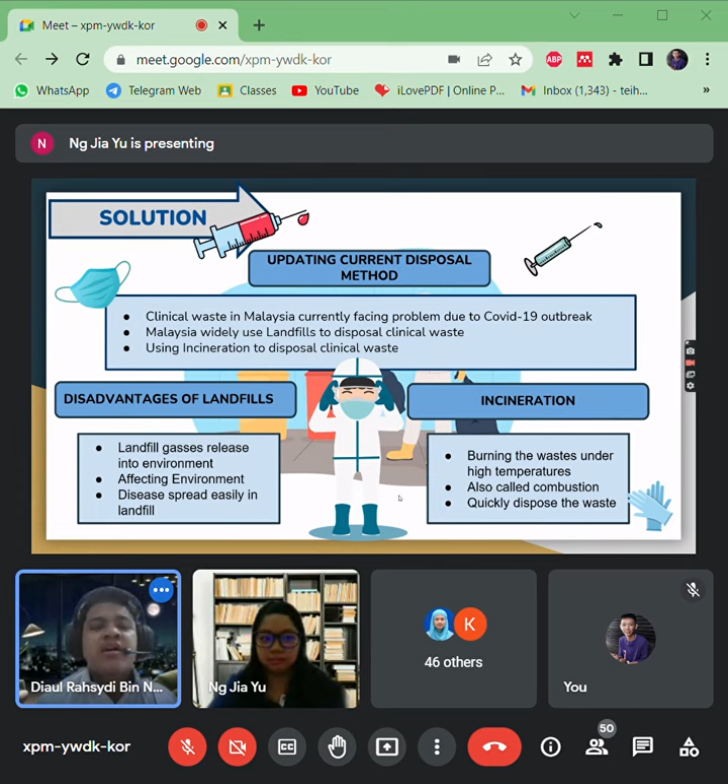One of the solutions to fix the problem is updating the current disposal method. Malaysia widely uses the landfill disposal method to dispose of clinical waste. Landfill has many disadvantages, such as releasing gases into the environment, like methane, ammonia, and carbon dioxide, which are dangerous for the environment and health. Updating the current disposal method from landfill to incineration will help to reduce the clinical waste problem in Malaysia.

Incineration burns the waste under high temperature, turning it into dust. It is also called combustion. The advantage of incineration is that it quickly disposes of the waste, while landfill takes a longer time because of the decay rate of the waste. Fully applying incineration in Malaysia will help to solve clinical waste treatment in Malaysia.

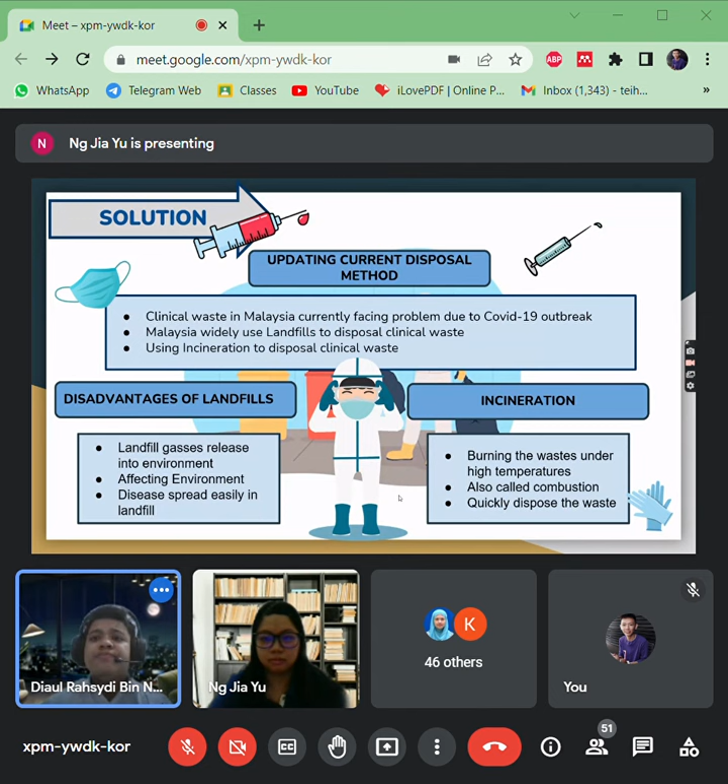Nowadays, our environment is continuously changing. Current issues such as global warming, pollution, waste disposal, and others occur and bring damage to our environment. These issues happen because society is not particularly concerned about our environment. Besides that, due to the gradual increase of COVID cases, clinical waste in our country has also increased. To dispose of clinical waste, we use the incineration process. It is the most efficient way to reduce the volume and weight of clinical waste.

For the technology of developed countries, they use the steam sterilization system to treat the clinical waste. For the incineration process, it needs a skilled technician to operate the machine. Besides, the fuel supplement problem will influence the efficiency of this process. This process also has its advantages and disadvantages.

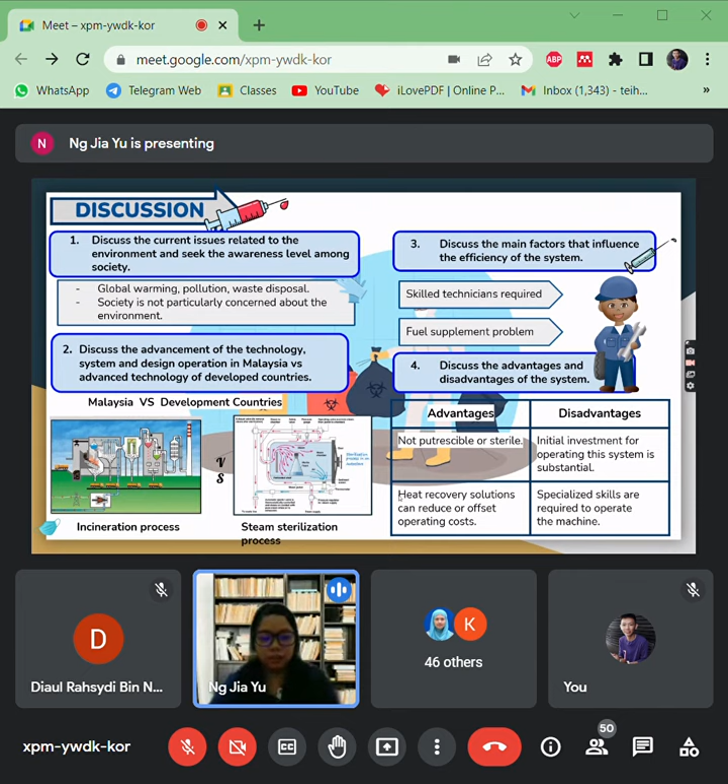Based on the finding, we can relate it with the theory of municipal solid waste, MSW. MSW is waste collected by the municipality or disposed of at a municipal waste disposal site. The clinical waste is known as MSW because it is in the category of plastic and rubber. From the interview, we know that the clinical waste in our country increased 20 to 70% during the period of MCO.

To improve this process based on our analysis, we can use expert systems such as computer information transfer and advanced computer process control technology. The task force of environmental engineers is vital in minimizing the amount of hazardous chemicals generated. Environmental engineers are responsible for preventing pollution from human damage as well as defending humanity from any major negative impacts that the environment may cause.

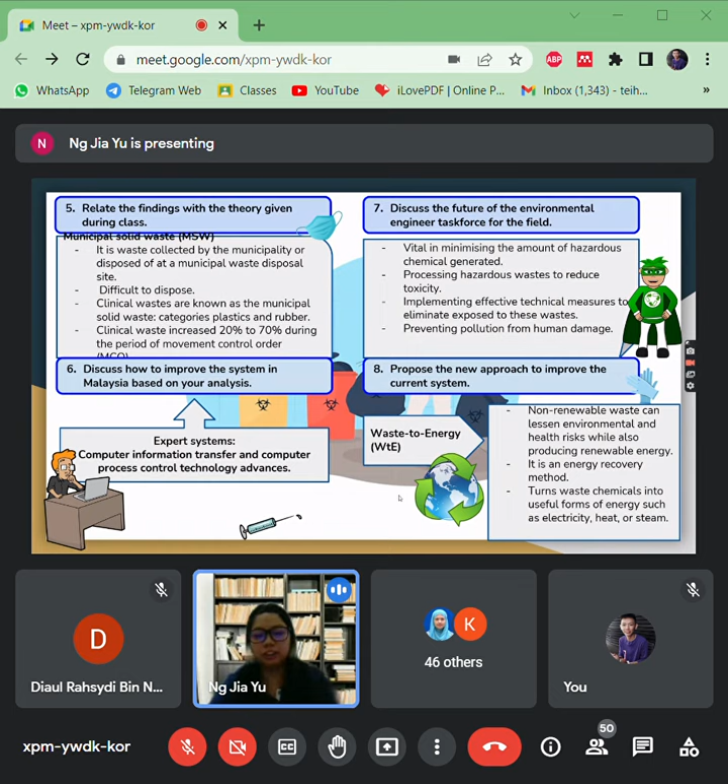The new approach to improve the current system is to use waste to energy technology, WTE. It is an energy recovery method that turns waste chemicals into a useful form of energy. That's all from me and I will pass it to another team member.

Lastly, in conclusion, the management of clinical waste in Malaysia needs to be emphasized because of the possible threat to the environment and human health. Proper treatment and disposal of clinical waste created by hospitals and other healthcare organizations and facilities is essential. Other than that, the government has led the charge to regulate clinical waste management through the Schedule Waste Regulation 2005, which established guidelines in handling a range of clinical waste.

Other than that, in our field as engineers, we can create and increase the development of new technologies that could save energy and time and prevent infectious, dangerous and radioactive waste from healthcare institutions. That's all from our group. Thank you.

Okay, thank you so much group number 8 for your presentation. So overall good because you have done the survey on the clinical waste management.

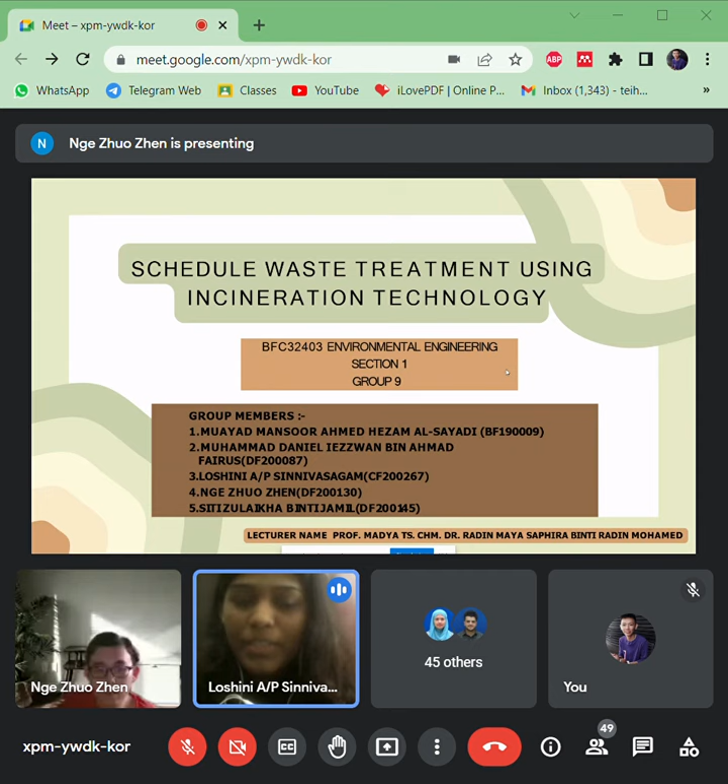We are from Group 9. Our project is entitled Schedule Waste Treatment Using Incineration Technology, and these are my group members, and I myself, Loshini Sinnivasagam. Next.

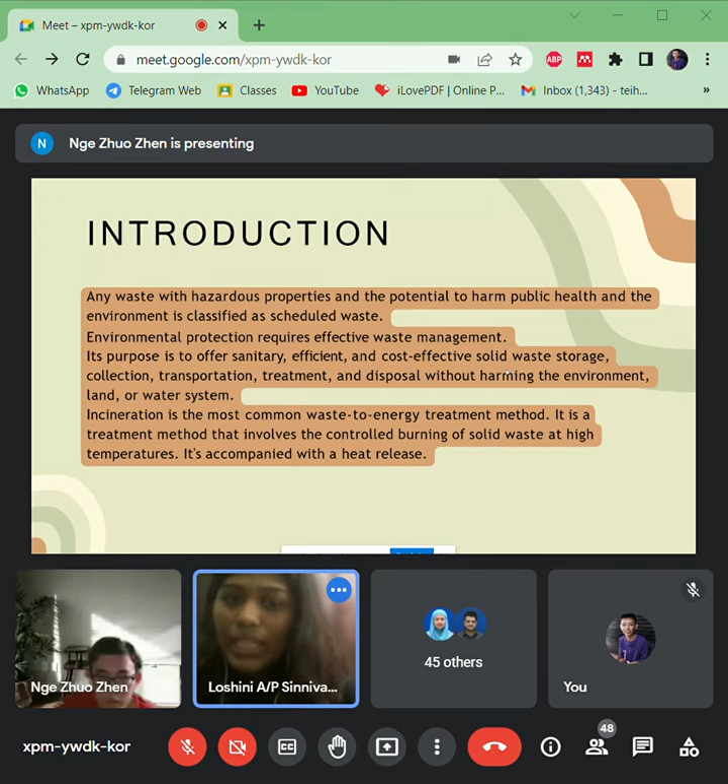Introduction. Any waste with hazardous properties and the potential to harm public health and the environment is classified as scheduled waste. And according to our title, incineration is the most common waste-to-energy treatment method. It is a treatment method that involves the controlled burning of solid waste at high temperatures. It is accompanied with heat release as well. Next.

So the objective of our project was to provide an overview of solid waste management in Malaysia with a particular focus on incineration, which is the most frequent form of solid waste disposal globally, including in Malaysia. So it is to ensure the protection of the environment through effective waste management measures, to protect the health and well-being of people by providing an affordable waste collection service, and also to promote and ensure the effective delivery of waste services. Next.

The problem statement of our project is the cost to dispose the scheduled waste is quite expensive. Improper knowledge on scheduled waste handling can transmit a lot of disease, and also there's no proper disposal mechanism.

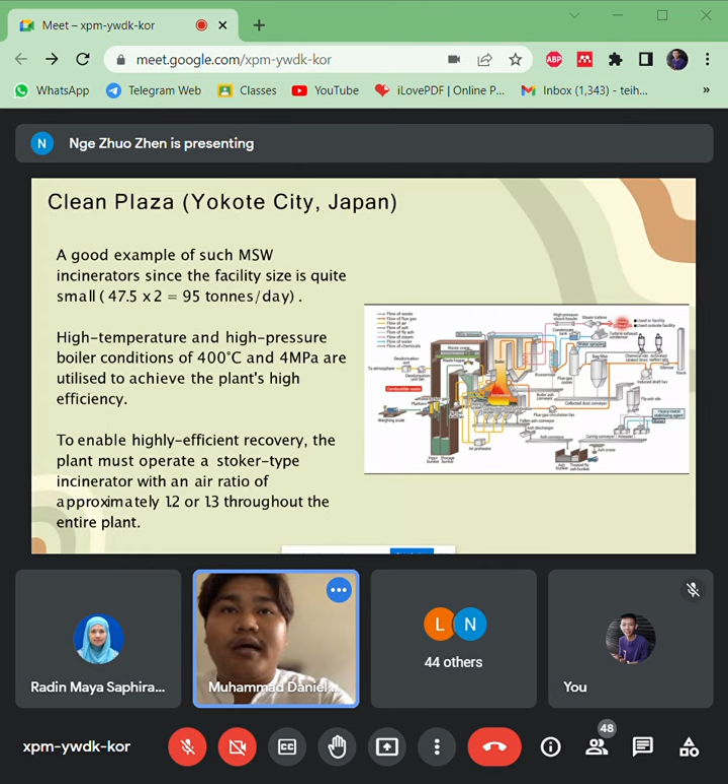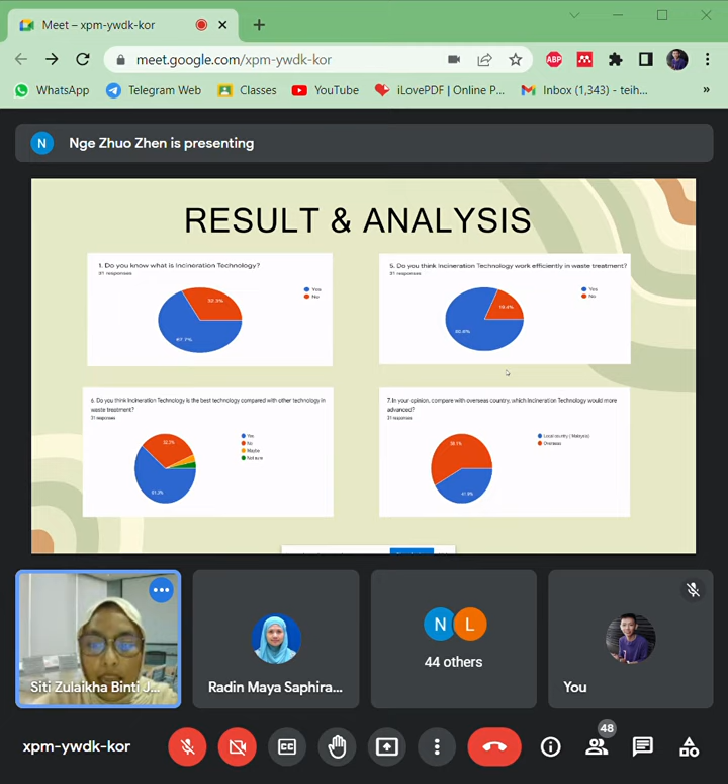Not just that, 58.1% equal to 18 students have thought that other countries have better and advanced incineration technology. Meanwhile, other 13 respondents have thought that our local country would have advanced technology more than the other countries. Next.

Okay, in the next question, the question asks of how to improve the incineration technology, and the pie chart clearly shows that 80% of all students who we have asked, they suggest to improve the incineration technology in Malaysia. However, less than a quarter of the students who we asked, that is around 20%, were satisfied about the technology of incineration in Malaysia. Moving on to the next question.

The other question asks about what aspect can be improved in Malaysia, and 41.9% of respondents had chosen air pollutants released from the incinerator, while 32.3% answered cost of the incinerator. However, around 25.8% just chose energy required to maintain the incinerator. Moreover, through this survey, 77.4% think that incineration is a better method compared to landfill, but 22.6% of the respondents disagree with them.

Last but not least, the question asks if we can make the incinerator safe, and the pie chart visibly shows that 87.1% of students we asked think that we can make incineration safe. However, 12.9% disagree with that, and they think we can't make it safe. So that's all from me.

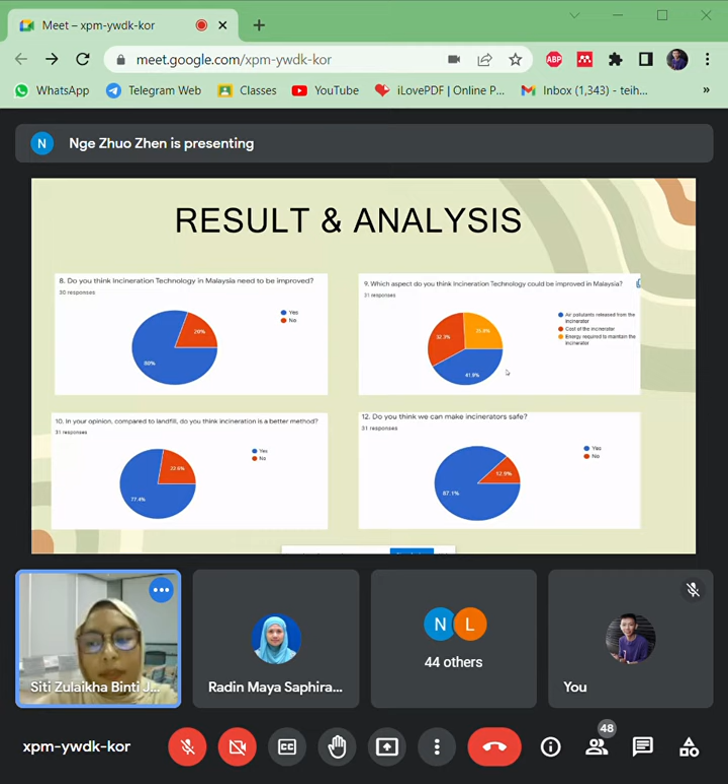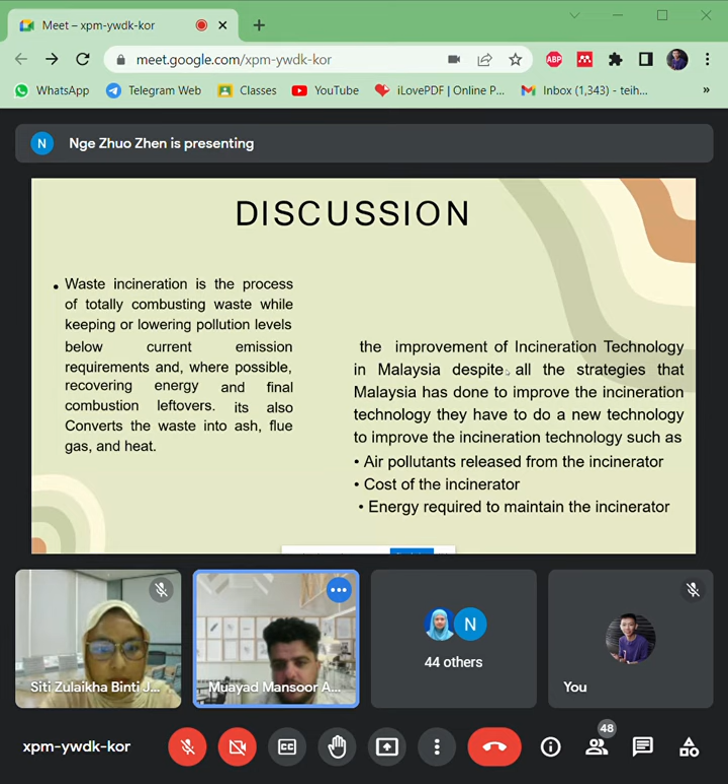Waste incineration is the process of totally combusting waste while keeping pollution levels below current emission requirements, and where possible recovering energy and the final combustion leftover. It also converts the waste into ash, flue gas, and heat. The improvement of incineration technology in Malaysia: despite all the strategies that Malaysia has done to improve the incineration technology, they have to do a new technology to improve the incineration, such as air pollutants released from the incinerator, the cost of the incinerator, and energy required to maintain the incinerator.

Next. The future of the environmental engineer's task for the incineration technology. Our Earth requires many environmental engineers who search and innovate new ways to keep it clean and promote and protect the natural life. For the new approach, we can improve the incineration technology by copying developed country strategies like Japan, how they improve their incineration technology, and we can do some improvement by reducing and avoiding wasting anything that will affect our environment, reuse what can be reused, recycle everything that can be recycled, and try to make things that we can use in our daily life, such as making fertilizer from the waste and using it for agriculture.